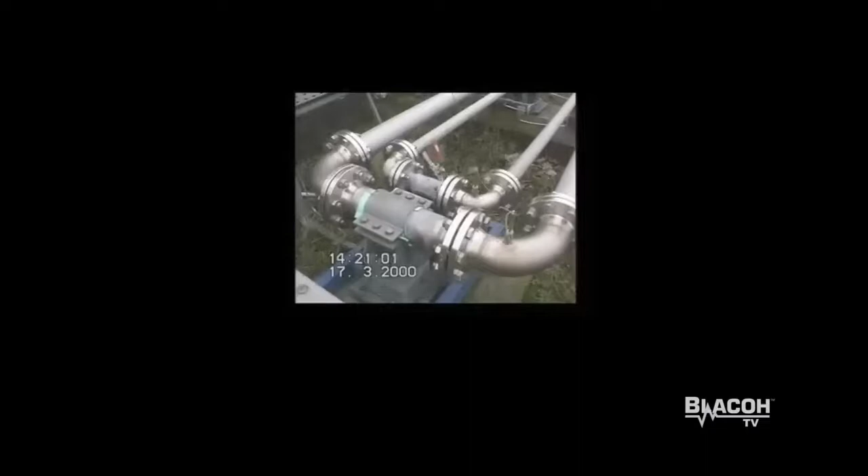Now pay attention to this because two things are going on. Hydraulic vibration and acoustic, okay? So what is this phenomenon? It's hydraulic shock, a momentary increase in pressure in a liquid system due to the sudden change in velocity of a fluid. That's the key point. It's not necessarily stopping the fluid, but a rapid change in velocity, okay?

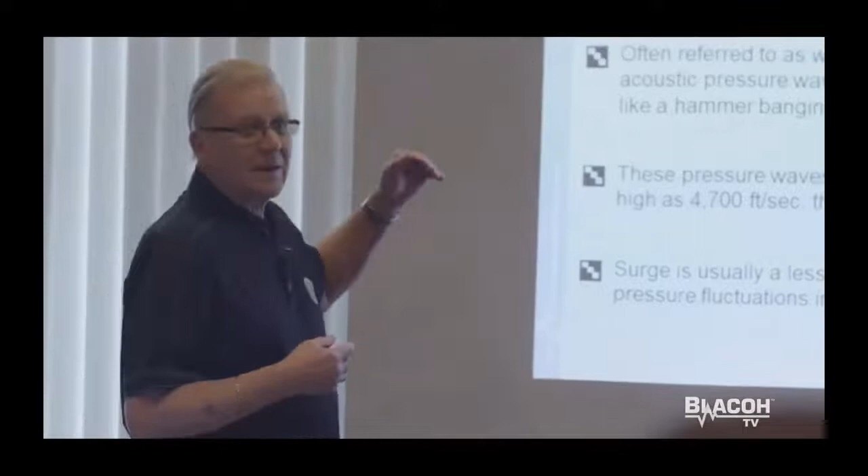Called water hammer because it creates this acoustic sound or this pressure wave or transient, and it sounds almost like a hammer banging on a piece of pipe. Now, since it's an acoustic wave, it's not just liquid shifting back and forth. This wave of pressure that's created travels at the speed of sound in water. Now, what's the speed of sound in air? About 1,700 feet per second. In water, it can be as high as 4,700 feet per second.

And that's important for a couple of reasons, but one of them is it's very hard for an end user or a customer to understand what's going on when a valve closes 500 feet away, 1,000 feet away, and at the pump there's an action almost instant. Now we've got our little coil demonstration. Most of you have seen we did that in the plant, and we can create some of that time lag. But people don't equate this acoustic wave with the reaction that occurs. So we're always emphasizing what happened, where did it happen, why did it happen, and then it's our job to figure out what to do to fix it.

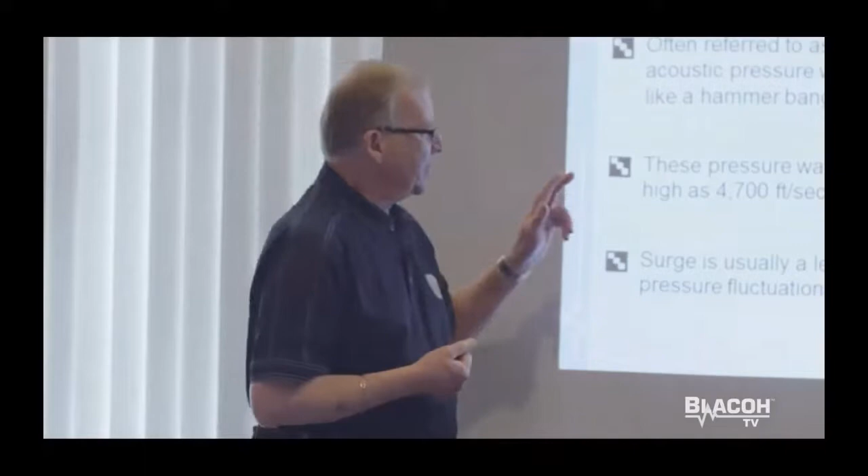Okay? And a lot of things can vary, but we call it water hammer or hydraulic shock. There's also a thing called surge, and the units are usually called surge suppressors, but surge is a less intense form of water hammer, and typically happens downstream of any valve closing, not upstream. So if we have uncontrolled hydraulic shock or water hammer, what's the potential? It can be 4 to 8 times momentary increase in pressure over the normal flowing pressure.

Okay, so I was a bit wrong. It's not 1,700, it's about 1,125 feet per second; in water it's 4,700. So with the same intensity, energy pressure in water is 60 times that in air. And that's why submarines have torpedoes that explode below the water line, right? Think about a tsunami and the energy that's carried for literally thousands of miles without dissipating. Liquid is a very efficient transfer of energy.

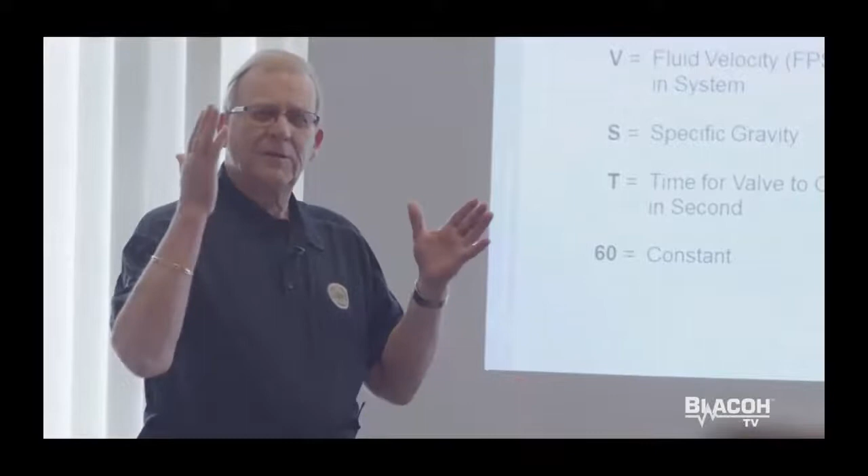A simple formula that's quite accurate in predicting what this pressure rise will be is 60 times the velocity of the liquid in the pipe, feet per second, times the specific gravity, divided by time. Typically, when we're talking about water hammer and a valve closure, which is probably 85 to 90% of the applications, we're using 1 second as a valve closure time.

This is a computer-generated graph of what happens when a valve closes instantly. You get an immediate spike and then a tapering off of this acoustic wave. It doesn't just stop, it reverses. When it hits another solid object, it reverberates back the other way and keeps oscillating until something breaks or the energy is dissipated through friction. Just much faster. A second is pretty fast, but in terms of water hammer, it's a long time.

So we're going through an exercise here: the velocity is 6 feet per second, specific gravity 1.2, and time is 1 second. Now, 6 feet per second in a process system is not all that fast. There are a lot of places going 8, 10, 12, even 15 feet per second. Obviously, the faster it flows, the more damage that can be done. At about 4 to 5 feet per second, you start being concerned about water hammer. So, it equals 432 PSI, okay?

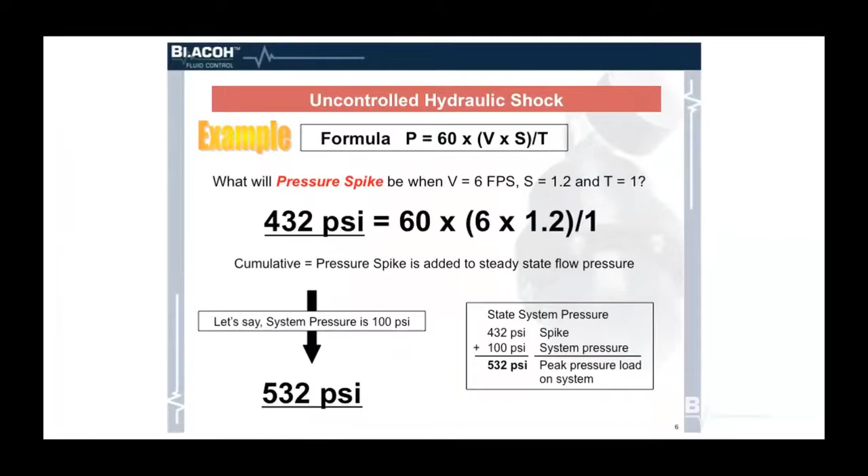Even taking that away, let's assume we've got plastic pipe, right? Plastic valves, and low pressure gauges, flanges, rated at 150 or 200, 250 even. And we're hitting it with 432 PSI above the system operating pressure. It's a formula for disaster, and it happened.

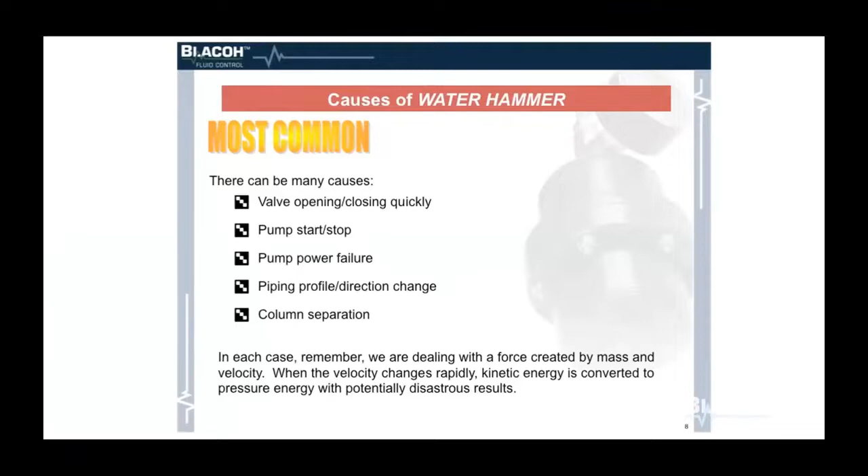Got a change in velocity rapidly, right? Valve opening and closing, pump start and stop, pump power failure, potentially one of the most dangerous areas there is, piping profile and direction change, and column separation. There are other factors that can create or increase the potential problem here, entrained air, because one of the things that we know about, and we will see later on, is that for all intents and purposes, liquid is not compressible, right?

But if there's a lot of air in it, or if it's hot water, there's a lot more air in it. You get the compressibility factor in there, now we've got a spring that can actually increase that spike as this water comes crashing to a stop. It's still moving, but there's air compressing in it. Then all of a sudden you get a secondary slam.

You know, no. The sad thing is no. We had a young engineer that had just graduated, worked for a summer as a work program with Blacoh years ago, Eric. I asked him about that. He said, you know, in 4 years of college, we touched on this for about 30 minutes.

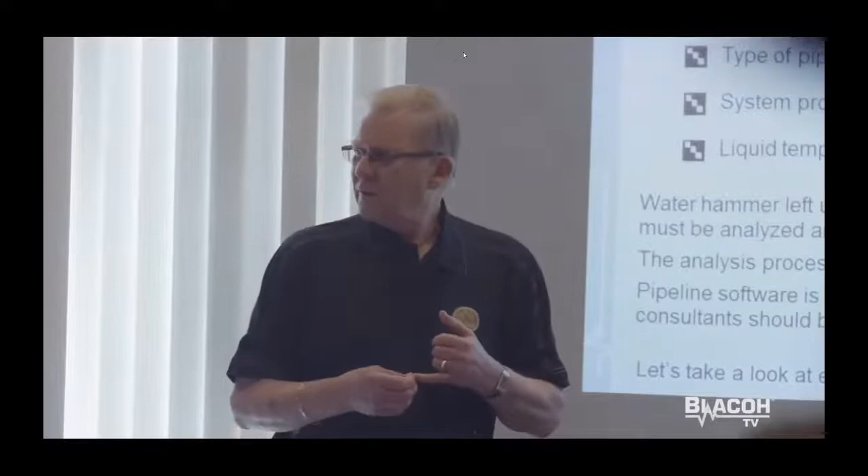You can't believe the number, well, you can, the number of systems that are designed without any concern or thought whatsoever for the consequences of valve closure. I took a course from an instructor several years ago who was an ASME instructor. We did a bunch of problems.

And one of them I always remembered was a 36-inch diameter pipe, 10 miles long, on a slight incline of 3 or 4 degrees. We calculated, and you can do this, the time to close the valve which will prevent slowing down the velocity too quickly. It took 24 minutes to close that valve, so you wouldn't have a rise in pressure.

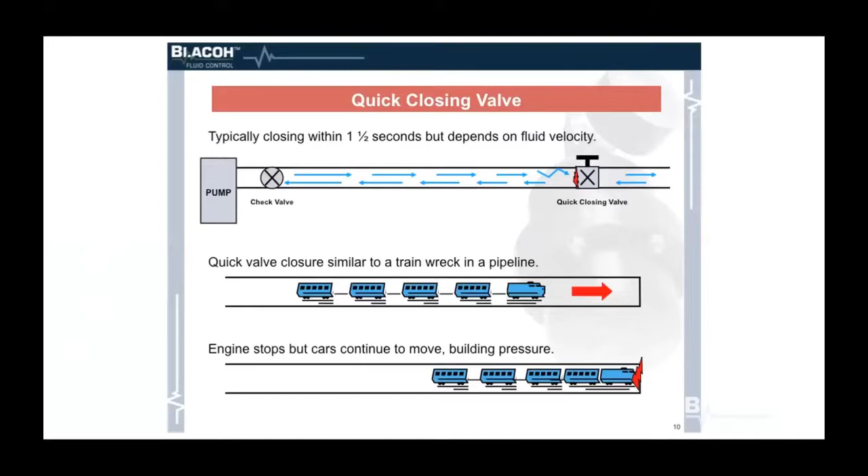Remember, the whole key is rapid change in velocity. If you can avoid the rapid change in velocity, you don't have a problem. And of course, that's where the Blacoh dampener comes in, our third step. Okay. Typically, closing within 1.5 seconds depends on fluid velocity. Quick valve closure is similar to a train wreck in a pipeline.

Okay, the engine stops, but these cars keep moving, and especially if there's more air in the liquid or more air between them. The first car stops, the rest of them still move until you get the big crash. I like to use the example of the crash dummy test, right? You've got this block wall, you've got a car traveling at 60 miles an hour. We'll get into this a little bit more.

And the car hits the block wall, stops rapidly. Velocity changes rapidly. What happens? The energy gets absorbed in the car, right? And the test driver and everything. If you put a spring at the wall so that the car came to hit the spring first, that spring would absorb the energy and slowly decelerate the car so that by the time the car hits the wall, there's no damage because the velocity is all slowly dissipated, right?

That's exactly what a Blacoh surge suppressor does, and we'll talk about that more. But think about it. The valve closes, right? The liquid is coming full force into the closed valve. If we have a surge suppressor properly charged and sized right there upstream of the valve, the liquid is directed up into the surge suppressor, which is just a big spring, right? So that liquid has a place to slow down, change the velocity slowly, and no pressure spike is created.

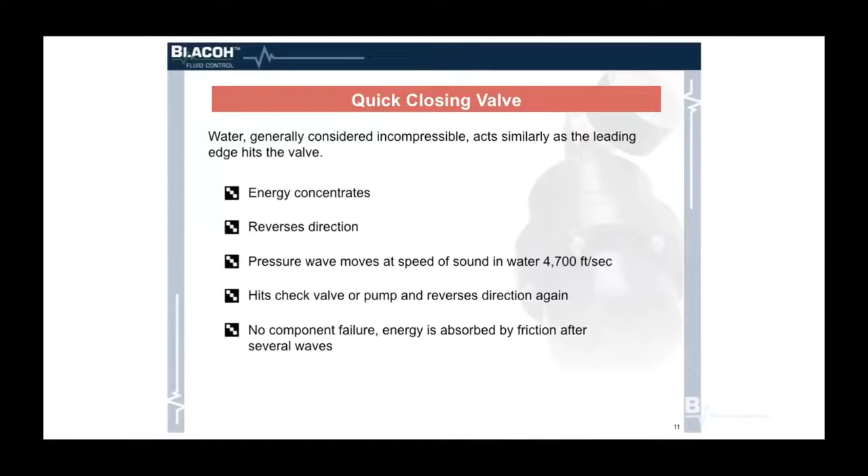And you can see that in that coil that we have. Energy concentrates, it reverses direction, pressure wave moves at the speed of sound in water, hits the check valve or pump and reverses direction again, back and forth. Energy is absorbed by friction after several waves.

This is a check valve in the system. And we'll do this, I think. Pressure on the downstream side is usually a drop in pressure, depending on what we talked about, the surge, which is on the upstream side of the valve.

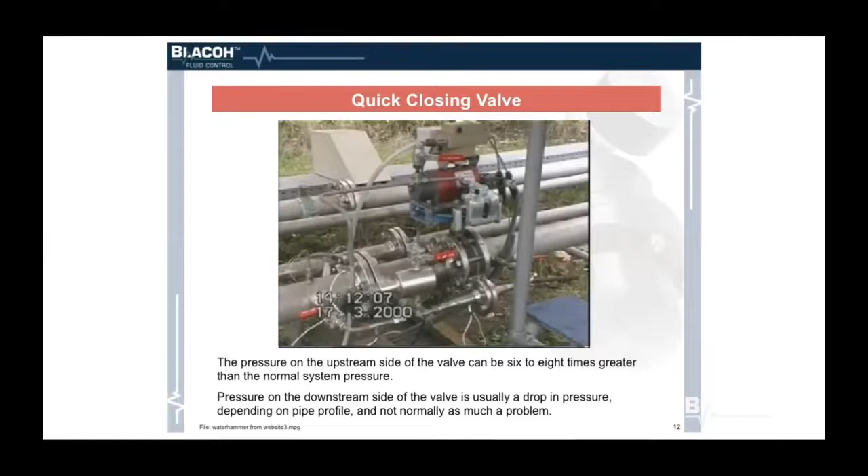That's the valve closure and hitting the check valve. Most all pump systems, see, there is the valve closure. Most pumping systems will have a check valve at the discharge of the pump to protect the pump when the pump is turned off. That's the check valve that was slamming. This is that whole system.

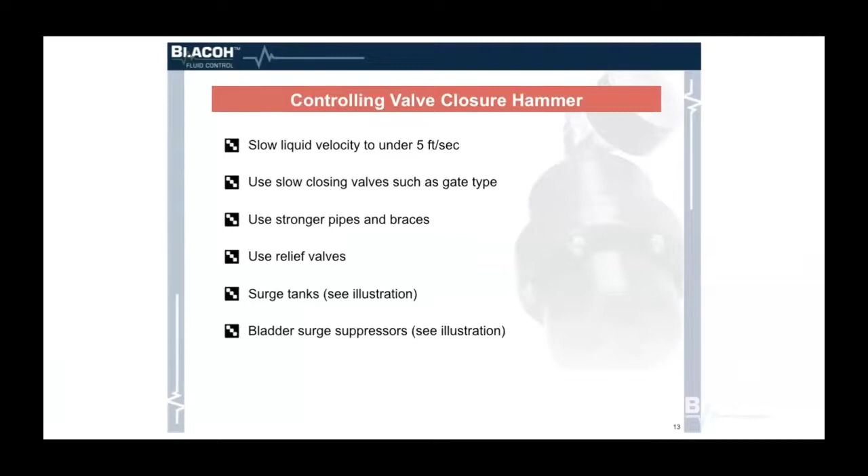So to control the valve closure hammer, slow the liquid velocity, use a slow closing valve, use stronger pipes and braces, use relief valves, surge tanks, or bladder surge suppressors. You could use any of these. The whole idea is either you're going to have to contain that energy or prevent it from occurring or transforming its makeup. I'm not going to go through all of these carefully.

One of the things that you can do is control the valve closure time, but typically they say, I want the flow to stop, I want it to stop as quickly as I can get it to stop. So they use a quick closing valve. You can use a surge tank, which is just basically a standpipe. The problem there is you can't keep the air separated from the liquid, so it waterlogs and loses its effectiveness.

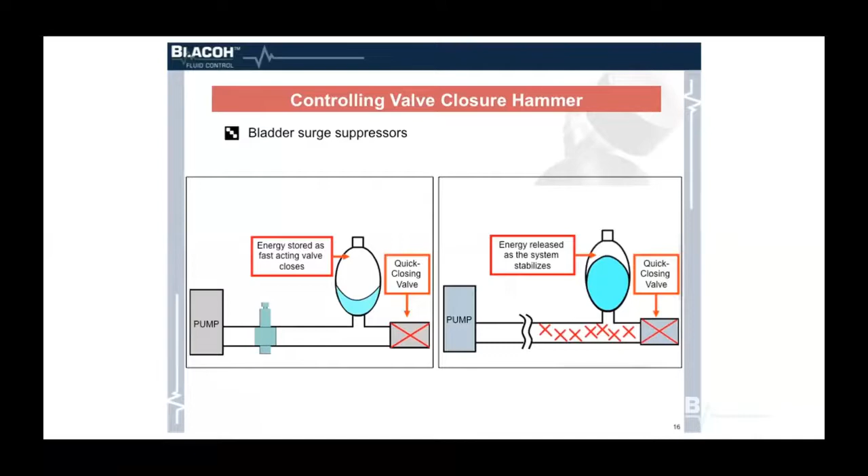The bladder surge tank is the best permanent, lowest maintenance product you can use to control this surge or water hammer phenomenon, because it keeps the gas separated from the liquid. We all know that.

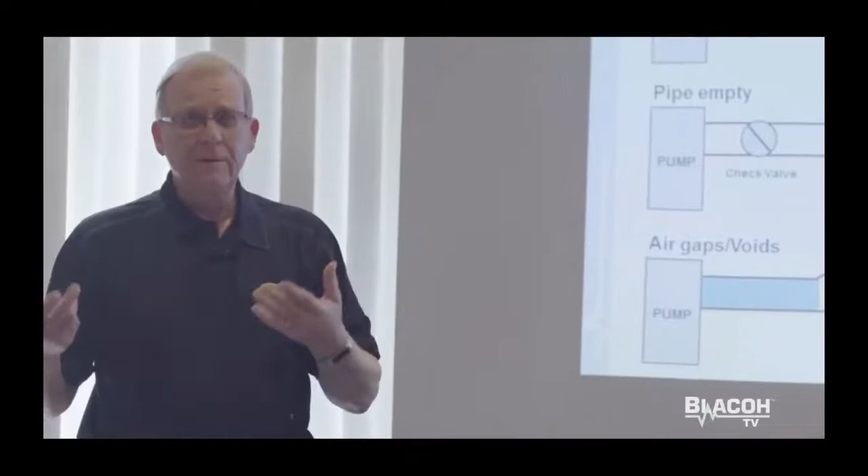Just some examples of what can happen now when you're running a pump, typically a centrifugal, but it doesn't have to be. One of the problems that can occur is when you have a pump start and the system line is full of liquid, but stationary. This is the problem. You have big sprinkler systems. That's why there always has to be some sort of a surge suppressor in these systems, because you're starting the flow of liquid against a block wall. And when that flowing liquid hits the solid liquid, that's not compressible and you get a big bang, okay?

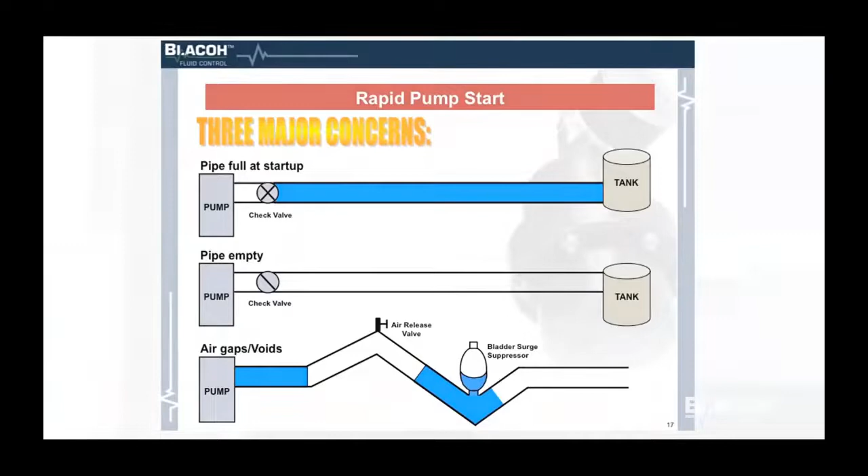The other situation that can cause a lot of problems is when the line's empty. Because now you're pushing liquid rapidly down an empty line that has only air in it. The air is going to move much more quickly without resistance until you reach some point at the end, which could be a reduction, an elbow, or any other thing that creates, again, a rapid change in that velocity.

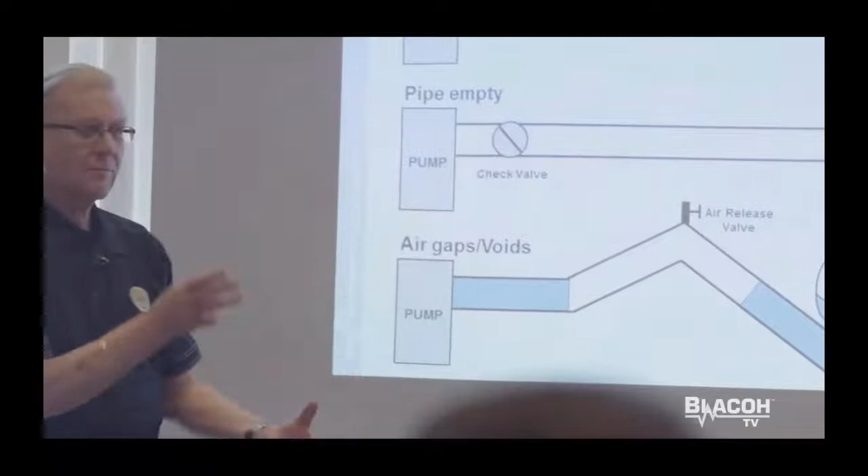Then there are other problems that start making these things complicated, and that's pipe profile. You can have liquid here and then a rise. When you turn the pump off, this area can be filled with air, then down below it can be liquid again. You start moving that liquid against air, and then it hits the solid line, moving liquid again, and you get all kinds of problems. So some of these get pretty complicated in the profile, and sometimes we have to get help doing these things, but most of the ones we deal with are pretty straightforward.

Now, this is what's called rapid pump shutdown, and you're going to see column separation. This also is a significant problem, because when you have liquid flowing at the discharge of the pump down the line, and you turn the pump off, the flow stops coming out of the pump. But that fluid will tend to return or reverse and come back, because you've got a section of pipe now with nothing in it, no air release, so you lower the pressure in this piece of pipe, and the liquid gets sucked back in.

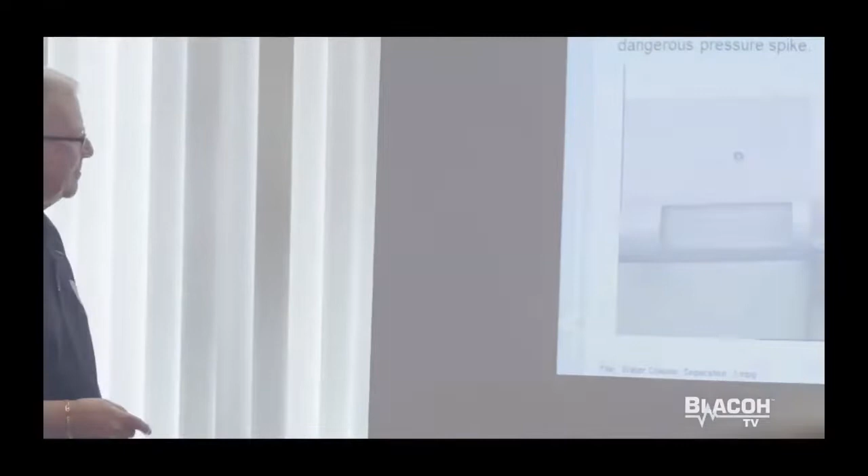It can actually be subatmospheric. You can go below atmospheric pressure in that section of pipe from the pump as the fluid moves away from the pump. Okay? So this is what happens, now watch this. It comes crashing back. And that's the reciprocating effect. What happened here is that acoustic vibration reciprocating, but here we're flowing along, the flow stops, the pressure reverses, and all of a sudden we get a big gigantic pressure spike as the flow reverses back through the pump.

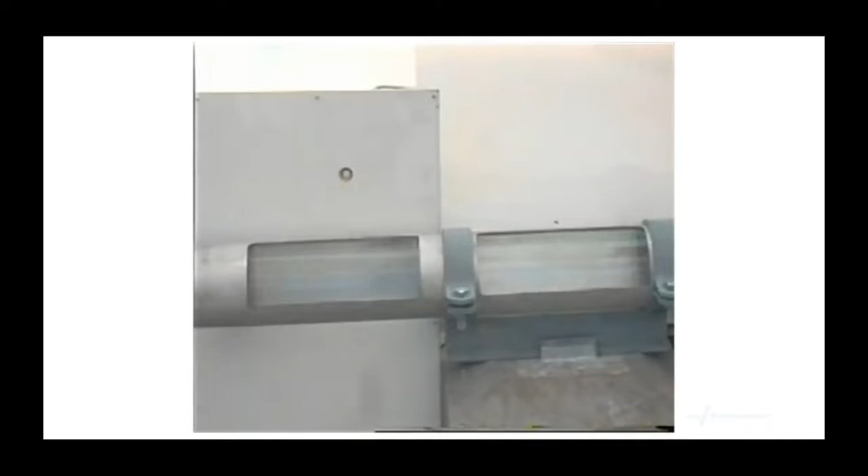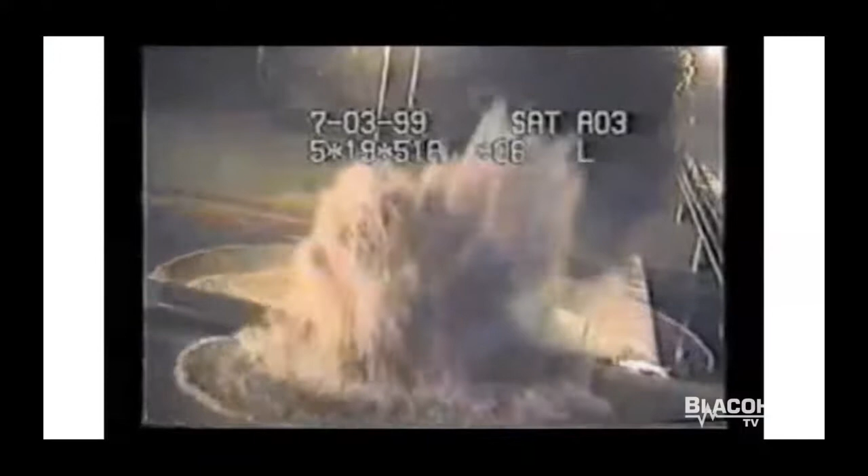This is big. That's a truck. There's the manhole cover. It's huge. All right, I'm going to go on because

So the ways you control start-stop are to use air release valves, vacuum breakers, slowly opening then slowly closing a valve at pump discharge, a check valve at the pump discharge, surge tanks, and bladder suppressors. So the same things you can use before. Again, the goal is to have the velocity of the fluid change slowly. Slow change, you don't get a buildup of energy all at once.

The suppressor acts, we talked a little bit about the spring and the block wall, but same thing on start-stop. If you throw the liquid into the line, you're going to have velocity hitting a non-moving column of liquid and a spike. But putting the dampener in is like putting a spring in, interrupting the system between the pump, which is the hammer, and the rod, which is the liquid stationary in the line. The spring absorbs that rapid start of energy by allowing the liquid to go up into the suppressor and hold it there until the non-moving column of liquid starts moving.

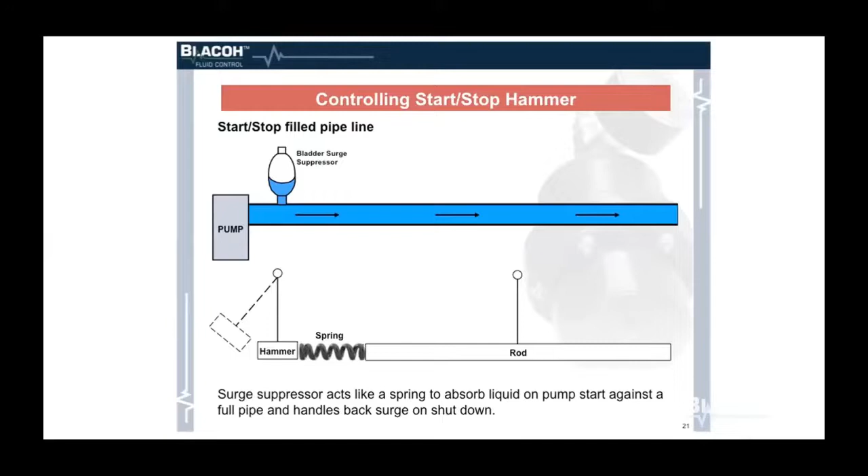It'd be like, let's say you're going to push a stalled car. You come up to it too fast, you hit the back of the bumper, you get an energy event and break bumpers, right? But if you put a spring on the bumper of the car you're pushing and hit that spring first, it'll first absorb some energy and then start accelerating the car in front of you, and no damage will be done.

Potentially the most dangerous situation of all is power failure, in which the pump is running, producing flow, and they lose power, which is unfortunately more common than people realize, especially in some rural areas. What happens is the pump stops flowing liquid. And remember our example of the liquid keeps moving and then reverses direction. And it reverses, and I can't give you the formula or the exact wording of it right now, but it reverses at the same velocity it went out.

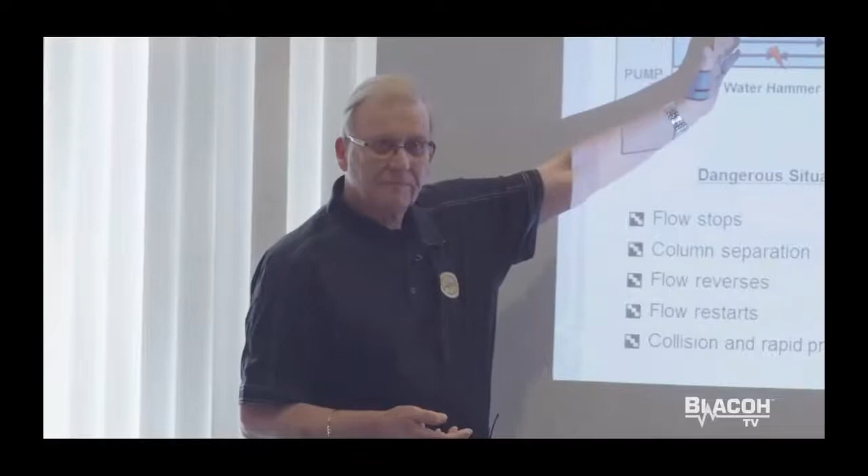So now it's reversing, it's coming back. Just as it gets there, the pump starts again. It's a momentary power failure. Now we have a head-on collision. So we've got the energy of this liquid coming and the energy of the liquid coming from the pump, and they collide somewhere in this area, and it's just catastrophic at that point. And again, putting a surge suppressor there is going to protect the system because it gives a spring where these two liquids come together and go up and decelerate again.

Now, in all of these situations we're talking about, with the exception of downstream surge, our device needs to be placed in the direction the flow is coming. If it's coming back this way, you would have a check valve here, and it would hit the check valve and go up in here. If it's coming from the pump, then you want this to flow up into the suppressor, and the check valve would be downstream. Okay, so the energy side is basically where the suppressor goes.

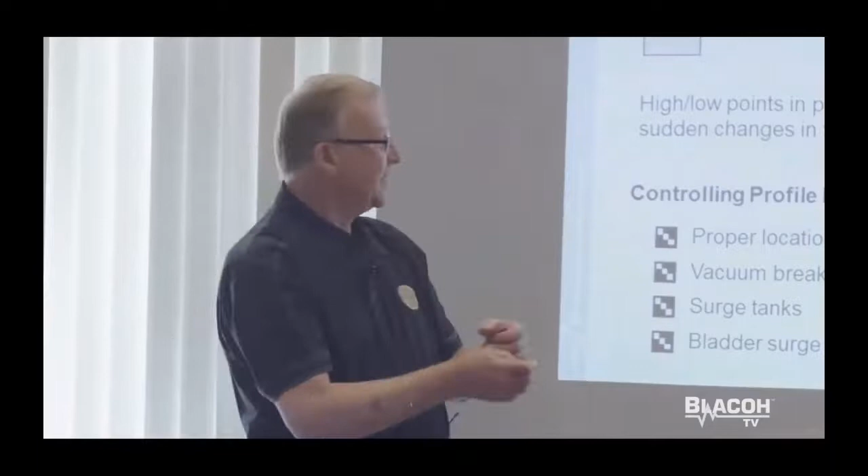Pipeline profile again can get very complicated, mainly because most of the customers don't even know the profile. But as you drive around the city, do you ever notice on some corners these green little standpipes with a neck on it and a tank? You ever see those? Inside is a float on a hinge; they're designed to let air out of the underground water system, so you prevent something like that. Those are nothing more than air release valves connected underground to the water system. And you see them all over the place if you take the time to look.

One of the problems is companies, especially contractors, like to try and get a low bid. They'll undersize the pipe. Well, to get the same flow out of a 1.5-inch pipe that you get out of a 2-inch pipe, what do you have to do? You have to increase the velocity, right? Which increases the pressure, which gives you that base pressure that you're going to rise up from when you have this event occur. So anyway, I say 5 feet per second there. Start looking at it at 4 feet.

This is what we need to know. What can happen? Why will it happen? Where will it happen? And then what can we do to prevent it? The toughest thing is when the customer calls us: what size pipe is it? Well, it could be 2, could be 3. How long is it? Well, it's 4 or 500 feet long, or 2.

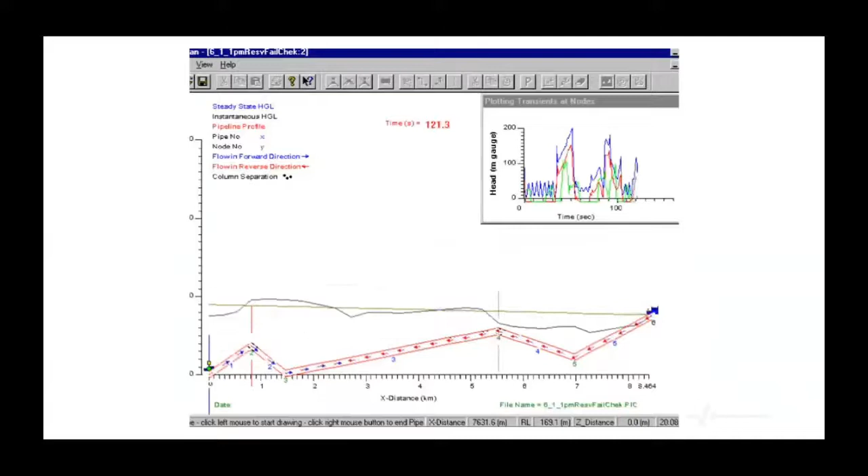Okay, now this is the whipping action. See the arrows changing as the oscillation occurs, and the pressure spike going all over the place, and then the profile up there of the pressure spike dissipating as it oscillates. And this is extreme stuff, but it happens every single day.

We had one situation with Graham. This was a diesel filling station for diesel locomotives, and they had a Blackmer sliding vane pump. We talked about those the other day, that they would use to pump the diesel to fill their locomotives, and these are like 4-inch lines, done manually. Well, when the tank got filled, the operator closed it, sent the shock wave back, and blew all of the sliding vanes out of the pump.

So we ended up putting, I think in that case, a 40-gallon unit out there. But my point is, this was all designed by an engineering firm, somebody who should have known the potential. It wasn't even considered. 90% or more of the applications we get into involving surge, and we get them almost every day, 90% of them are after the system has been built and operating, and then they find they have a problem.

But after the plant opens and after the first event occurs, then they're scrambling, and sometimes it's really difficult to find a spot to put the units in, and if you don't put it in the right place, it's not going to work. Remember, we said this is traveling at the speed of sound in liquid, which can be as high as how much? 4,700 feet per second, right?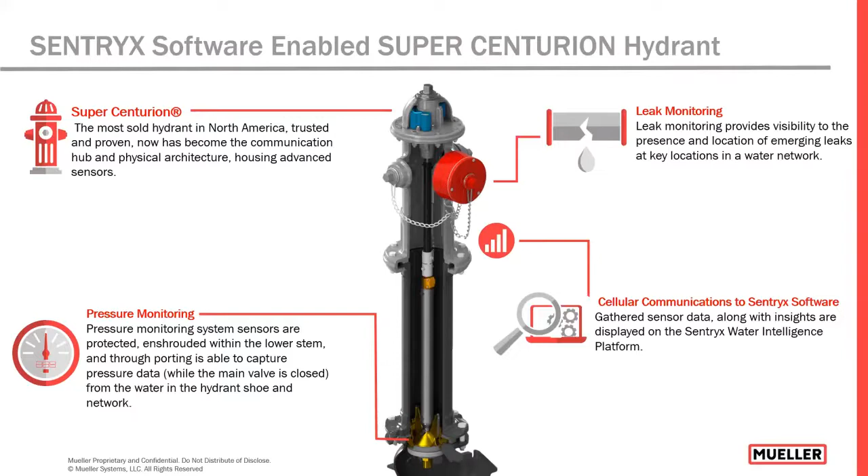So this is really just showing what all Mueller is trying to do, and this is not limited to Mueller products. So we really want to bring all the data points out in the system into one place. That's what I was emphasizing at the very start. Just having leak detection or just having water quality isn't telling the full story of what's happening in your system. So we have the Sentryx software.

That's collecting all of this data into one user interface, and then it'll allow utilities or supervisors or field techs to be able to look at your phone, look on your laptop, or even get alerts saying that a pressure has dropped and a leak has happened in between these hydrants. So really wanting to bring all of it together into one, because that's what we believe is going to bring the most value and the best decisions from these data points, is if you can see the full picture.

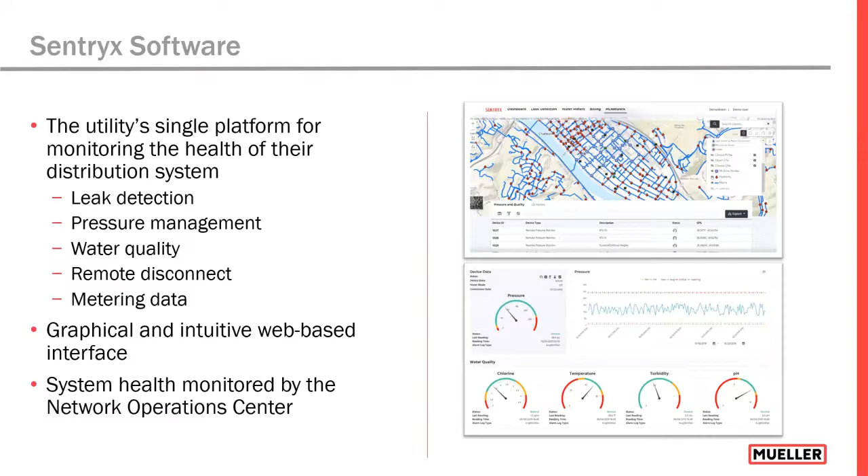So a really good overview of the smart hydrant. Again, it will be leak monitoring and pressure monitoring. That will be the two options. If you do have PVC mains primarily in your system, you can just have a pressure monitoring hydrant. It does not necessarily need to have both. But for pressure monitoring, it will be a dry barrel hydrant, so you don't need this hydrant charged. You don't need water pressure up to the cap. It will all be in the closed position and in the dry barrel position.

There will be no wires. It is a wireless design. I'm going to go through kind of how that looks and what the smart stem looks like. But basically the data is collected from the shoe area and then Bluetooth to the bonnet, which is then going to push its data through the cellular network. So there's no wires. If a car hits this hydrant, it will break just like a normal hydrant would right there at the safety coupling. And there won't be any wires sticking out or anything like that for your customers to worry about. So it is a wireless design and would operate very, very similar to a Super Centurion.

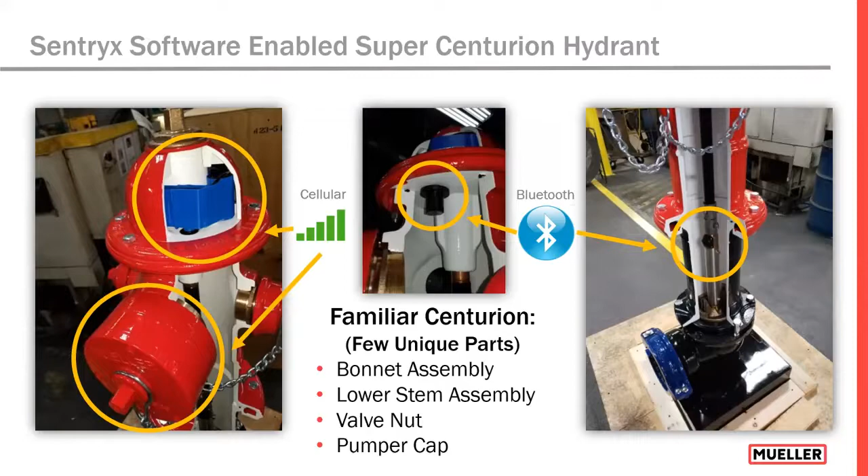The leak monitoring cap will also look very similar to a pumper nozzle. It's going to have the threads that your utility uses on a regular hydrant, and the op nut will be similar to what each utility has for their hydrant fleet. Sandwiched right in the middle is the processor, the battery, the antenna, and the acoustic sensor. It will really only stick out a couple inches from a normal hydrant cap, but it will look and feel very similar to a normal Super Centurion cap.

You see there in the middle, the smart stem. It'll have a Bluetooth antenna. It'll have the pressure sensor that will go through the main valve into the lower part of the shoe, and we'll be able to get pressure from the closed position. And then you see there a smart bonnet. It's going to have the same look as the Mueller bonnets. It will have the opening direction, where it was made in Albertville, Alabama, and again, that oil reservoir where you can put food grade oil into your Mueller fire hydrant.

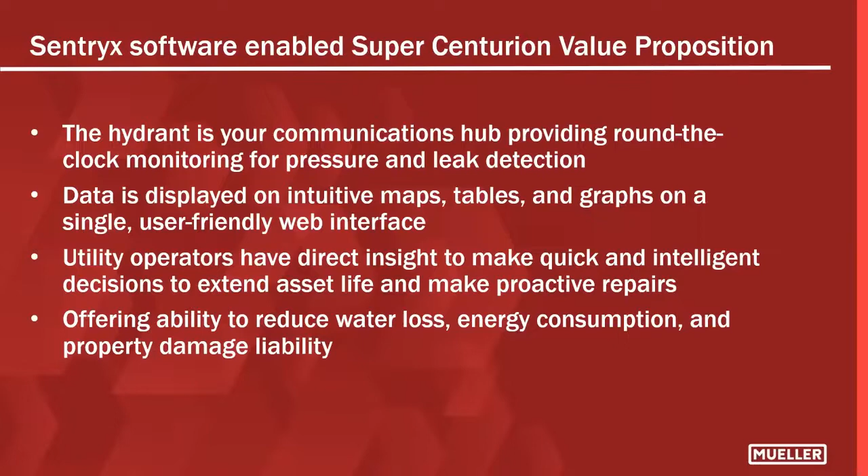So with that, it will reduce water loss, and it will reduce your energy consumption and the liability that leaks or transients can cause in a water system. We want to help out in every way we can. So with that, we'll open it up for questions, because I don't want to go over if people have time here. Does anybody have any questions for Bobby?

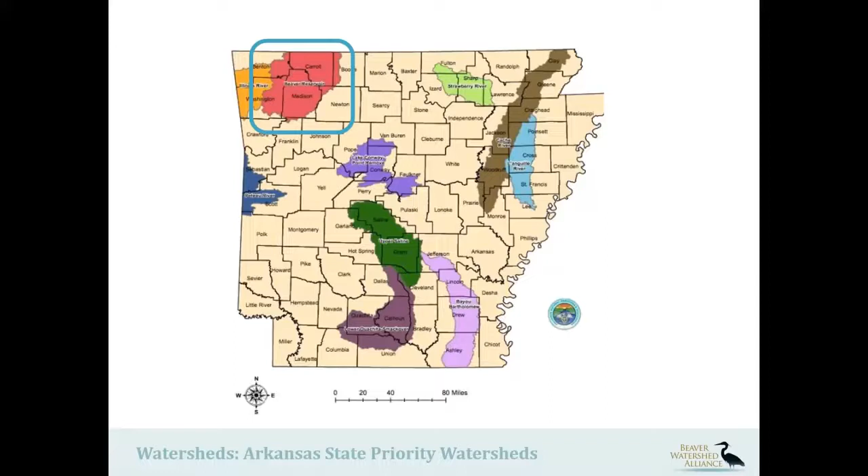And there are segments that are listed on the 303(d) list. Those are defined every 2 years by the Department of Environmental Quality. And those segments, we're just looking at trends and things over time, and it also helps guide our work on where we could do best management practices to proactively prevent future segments from going on the 303(d) list, but also try to address some of these impairments and repair or restore waterways.

So sediment is the #1 pollutant to Beaver Lake, and we call that non-point source runoff because you can't point specifically to where it's all coming from. It's coming from several different sources. So dirt roads or stream channel erosion, or maybe ag runoff or construction runoff. These are the different sources of, when it rains, sediment flowing off the landscape and into a nearby waterway.

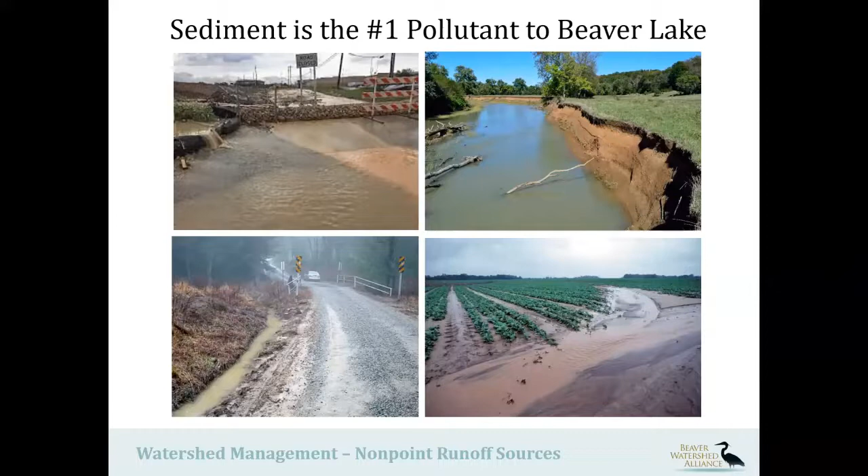And with that sediment, it can carry phosphorus and nitrogen, which can cause algae growth in our waterways. And so that algae growth is expensive to remove for water utilities, but also can have effects on aquatic species and humans.

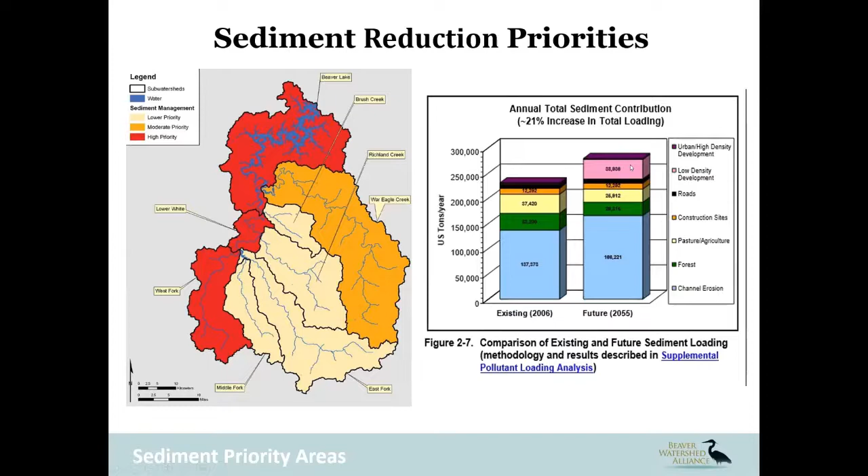And the chart on the right, this is using modeling and data to show us that channel erosion is the largest contributor of sediment, but in the near future, low density development is expected to increase and contribute more sediment loading to our waterways. So something to think about as we grow and develop, how we can protect waterways as we do that.

Northwest Arkansas is a rapidly growing region, especially there in the core, the western side of the watershed, and the eastern side of the Illinois River. That's the Rogers, Springdale, Fayetteville, Bentonville area, growing very rapidly. And last we heard, 32 people were moving to Northwest Arkansas per day. We're expected to have over 1 million people by 2040.

So just to kind of go through some of these different things we're doing to help address water quality in this area. Our best outreach method is to reach landowners directly. So we mail out newsletters to them directly. So if you live in the Beaver Lake watershed, you may have seen our newsletter; you get that 3 times a year. And we try to put information in there for landowners on how they can take advantage of programs or how we can help them manage water on their property.

We also have an e-news that we send out every month that has a lot of information on events and things to participate in, or just general updates. We're on social media. We host a quarterly speaker series covering topics for water quality professionals. We have an annual Beaver Lake Watershed Symposium each year. And we also do a number of public speaking events like this, best management practice workshops, and we also have youth programs as well.

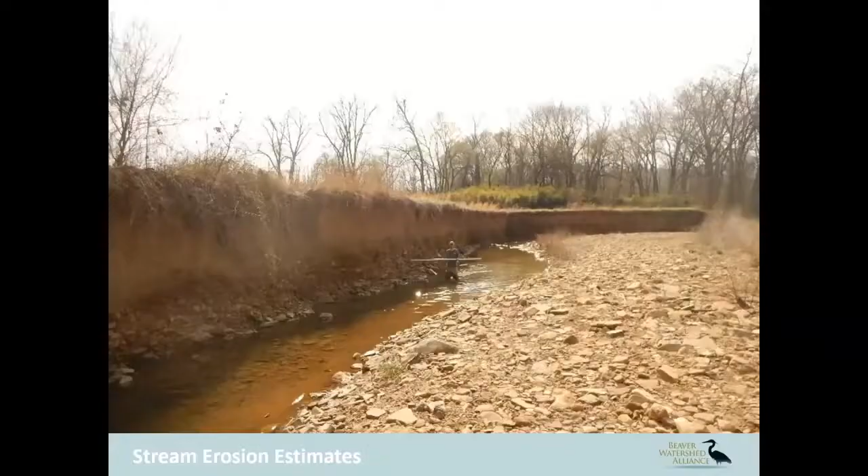We work with partners to also measure stream erosion rates to learn the sediment loads coming from specific areas of the watershed. This is a project with the Watershed Conservation Resource Center. We came back in, this is the same spot here. You can kind of see that River Cane in the back as a point.

And through funding with the West Fork White River Initiative, the USDA program, we're in year 5 of that, we're able to help these landowners restore these waterways. And these restorations are done in a natural way. So they use a lot of plants and rock and trees and things. So it not only stabilizes the bank and prevents sediment from going into the waterways, it's also providing a lot of other benefits like fish habitat.

You know, the West Fork water has, they've lost over 2/3 of their aquatic species. So they're trying to bring back the smallmouth and largemouth bass to these rivers. So these types of restorations can help with that. It's also helping the landowner.

With the price of an acre in Northwest Arkansas today, losing land is not a great thing. So we've had some landowners report losing up to 4 acres of land per year along these riparian areas. So when these areas are restored, it helps keep that land intact, but also helps improve water quality.

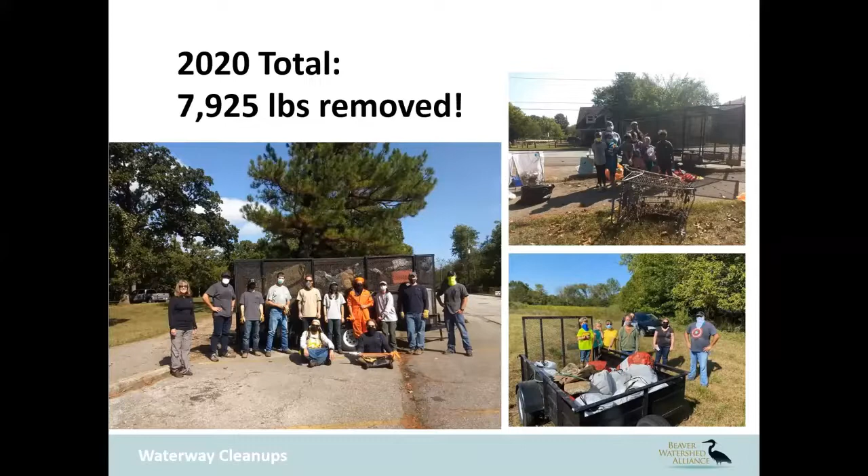And we also conduct scientific monitoring. So we do serve on a harmful algal bloom work group for the state. We are contracting with the University of Arkansas to monitor water quality in the West Fork. We help support a stream gauge at the White River over in Bunch Park at Elkins. We help with pond sampling.

We participate in Secchi dip-ins and Secchi Day with Beaver Water District. And we're monitoring ponds, streams, and we're also doing a lot of studies on before and after best management practices installations.

So some of our current initiatives for this year are, as I mentioned earlier, the USDA program for the West Fork. We're in year 5 of that. And we're really working to technically assist these landowners. Over $8 million is being invested in this watershed to improve water quality.

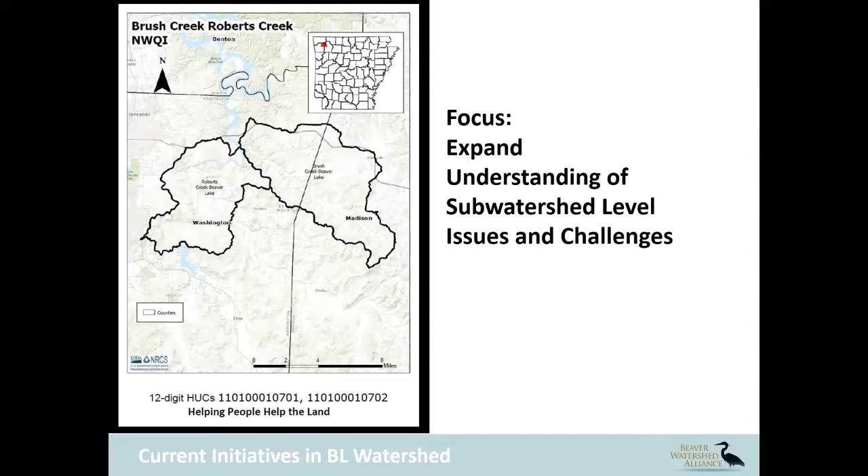We do work with a number of partners, and we appreciate our partners that help fund these activities, but also our partners that help provide their time, their resources, their expertise. We just work with so many people, and it really does take a group to work together to achieve these big goals. So we want to thank all of our partners that help keep Beaver Lake watershed clean and healthy.

Okay, so if I have a few more minutes, I'm going to cruise into the watershed tour, if that's okay. Yeah, sure. Cruise on in.

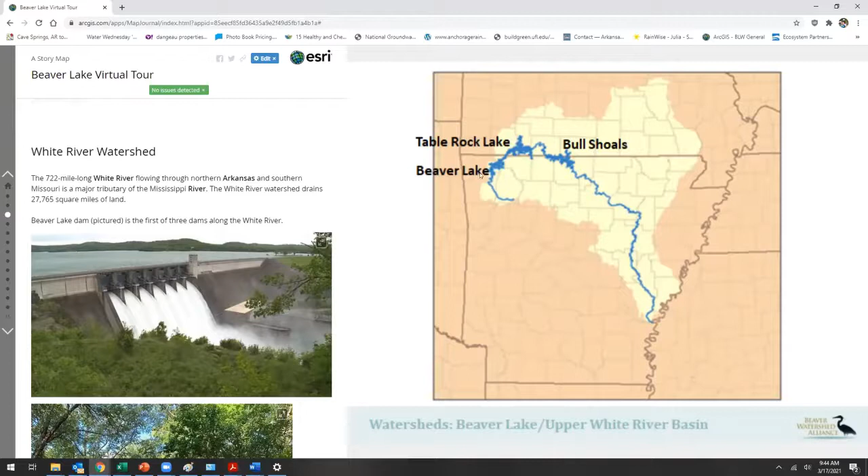So it's pretty neat to think that the White River really starts here in Northwest Arkansas, on places like Mill Creek and these small creek areas. But by the time you get over to Calico Rock, which is over here, just south of Mountain Home, the rivers have joined, and now you're looking at a large White River system.

The Beaver Lake watershed encompasses over 1,000 square miles, and it covers portions of Washington, Benton, Madison, Carroll, Franklin, and Crawford counties. The greater Beaver Lake watershed area stretches beyond the dam and includes the Kings River and waterways draining to Table Rock Lake. But our strategy and our focus is basically from Beaver Dam, which is located about right here, everything upstream here.

So the sub-watersheds, watersheds are nested within watersheds. We could get very small with these, but these are the 7 sub-watersheds that we focus on. And that includes the headwaters, the War Eagle, Richland Creek, the Lake Sequoyah or East Fork of the White River, the Middle Fork, the West Fork, and the Lakeside area.

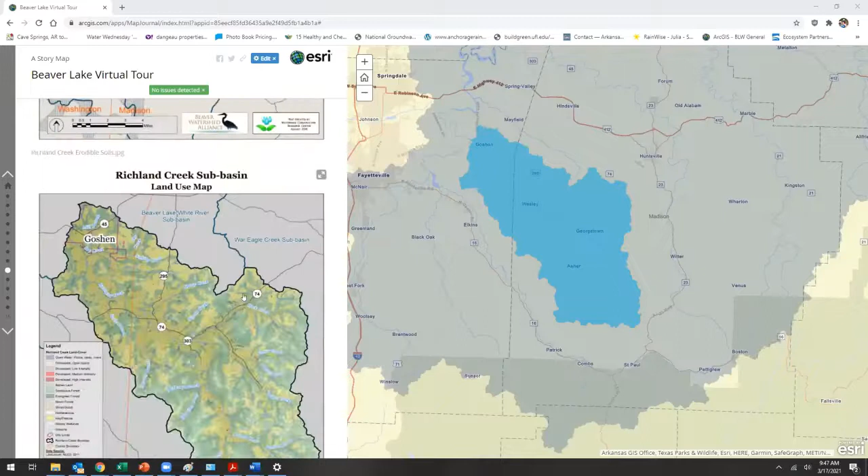Let's see, Richland Creek here, also very steep and highly erodible soils. Again, it's mostly forested. About 55% is forested, and about 36% of this watershed are pasture or hay areas. A number of unpaved roads identified here as well.

But you see here, these are the issues we're dealing with on Richland Creek. These large stream erosion issues. We get calls from landowners quite often on these things. And if you've ever been to Twin Bridges, that's where Richland Creek and the White River come together there.

So another thing about these rural watershed areas is that there's a lot of septic systems. So there's programs that are coming out through the state and local groups that are helping to address septic system repair and replacement. So that is something that can help improve water quality.

And I thought this was interesting. There's over 7 rural fire departments that serve this Richland Creek watershed area: Goshen, Wesley, Japton, Elkins, Round Mountain, St. Paul, and Bohannon Mountain. They help cover those areas through the volunteer fire departments.

And this is important too, because as Northwest Arkansas grows, more people are moving to these rural areas. So that means more housing and demand for new infrastructure. So there's going to be a need for more rural water service providers, fire departments, things like that. So it's important to work together so that we have these resources for infrastructure. That's a really nice picture of Richland Creek there.

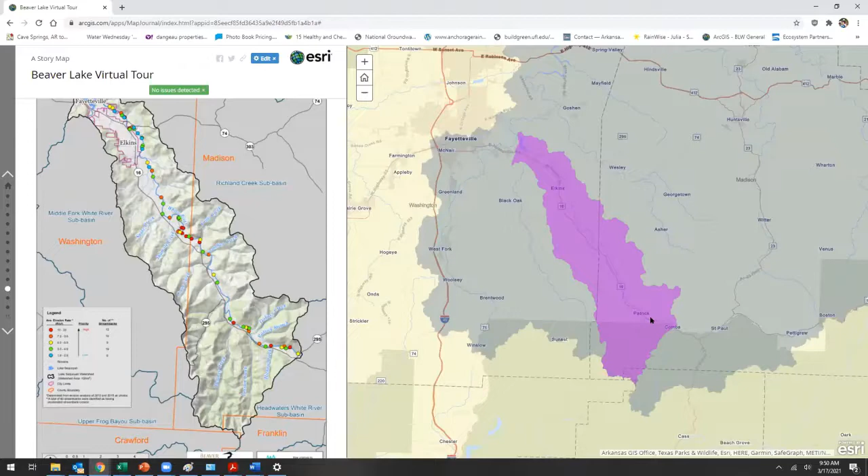Oh, and what's interesting here is this is about 70,000 acres of land that's draining to Lake Sequoyah. So if we think about Lake Sequoyah and the water quality there, that's a large amount of land that's draining to that lake. So it's important to do best management practices and manage water here for Lake Sequoyah as well.

And this is Lake Sequoyah out here. If you've been out there, there's actually an old bridge you can see, which is the bridge that went over the original White River channel. So it's pretty neat to see that's how big the river was at one time. And so it's really neat to have these little pieces of history that are still within our watershed.

So the Middle Fork, a pretty rural area, the community of Black Oak out there. And again, mostly forested area, very erodible soils. And the furthest watershed here is the West Fork of the White River. And this is important because this is where a lot of development's going on. So Southern Fayetteville, Greenland, West Fork, all the way down to Winslow.

So that's the West Fork watershed area. It covers about 80,000 acres. And there are segments on the West Fork that we saw earlier that are on the 303(d) list. So we're working with a lot of partners to address sediment and runoff issues happening in the West Fork. And again, it is a priority watershed.

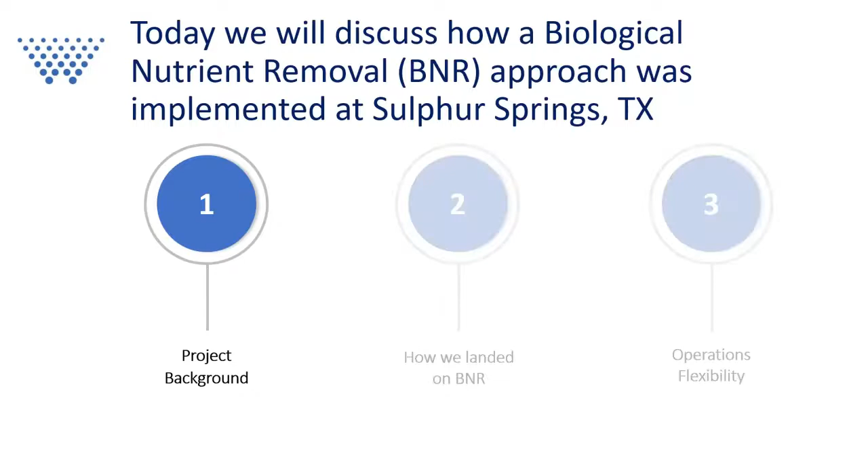So today we will discuss how a biological nutrient removal approach was implemented at Sulphur Springs, Texas. So I have three points here. We're going to go through some project background, how we ultimately landed on a BNR scenario, and then some of the things that we did from an operations flexibility standpoint that really made this facility ready for the future. So next slide, project background.

So Sulphur Springs, Texas faced an immediate need for aeration improvements. What we had here was a conventional activated sludge plant that really just had a series of CSTR reactors, all operating in parallel, with mechanical aeration. This is a picture, and I apologize for the graininess of this graphic, but this was an existing 5.4 MGD wastewater treatment plant that operated, again, as conventional activated sludge.

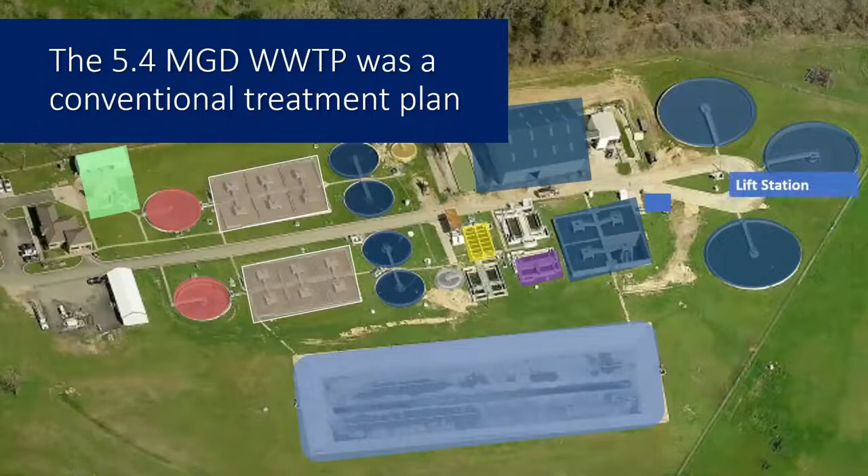You can see here, we come in, we have a lift station, we have a flow equalization basin there on the bottom of the screen. We had a headworks facility with grit removal, followed by primary clarifiers, and then again, the activated sludge system. We have a north train and a south train. It's probably a little hard to see, but there's 6 individual cells on the north and 6 individual cells on the south, and each cell had a dedicated surface aerator or vertical turbine mixer.

All the primary effluent flow went into this center channel and then was dispersed equally. Well, it was supposed to be equal. We know it wasn't. The flow split was definitely a concern. But each of those 6 cells in the north and the south were supposed to get the same amount of flow. Then mixed liquor would flow over an effluent weir in each cell down a common channel on the outside and then go to the clarifiers.

What is that? Sulphur Springs, Sulphur, Texas, I think he said.

Yeah, Sulphur Springs, Texas. And then we had filtration that was already at the plant, and then chlorine disinfection with the chlorine contact basin. So that kind of

sets the stage. You guys still hear me? My computer just flashed. Loud and clear, buddy. Okay, good. Well, all my Zoom stuff just went off my screen, so I was worried about that. I'll keep going.

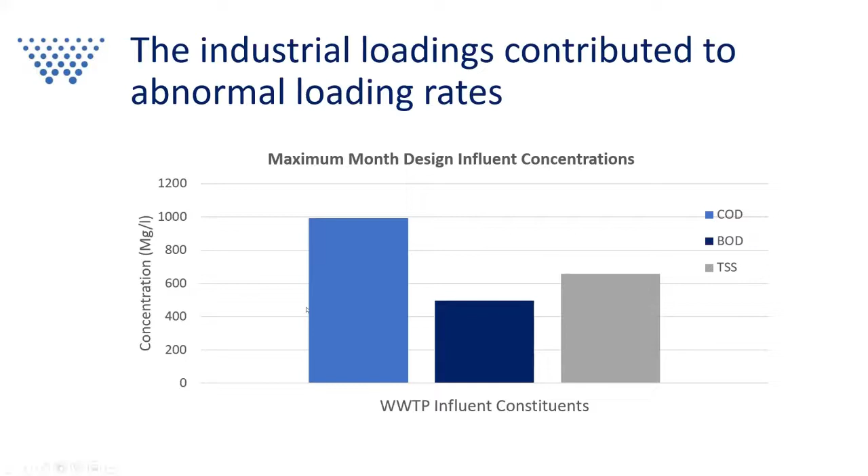The surcharge wasn't really enough to cover the cost overruns, but there was a lot of political pressure to not press back on the industry too hard with fear that they would leave the town, and it was a very big source of jobs for the city of Sulphur Springs. So we know that can always be an issue, and that's something that had to be considered in this particular facility. So these increased loading rates overloaded the existing wastewater treatment plant. The flows didn't necessarily come close to the design capacity, but it was the loadings.

And Sulphur Springs received notice of violation from TCEQ for TSS, ammonia, BOD, pH, chlorine residual, and the overflows they had in the system. So they entered into an agreed order, which meant, hey, you have to go do an engineering report and really figure out what your problem is. So I like to show this slide. So an anomaly was discovered before we even started the design process.

So on the x-axis here, you have dates. So this was a project that we started the study on back in 2015. So it's a few years old. So you can see this data range is January of 2010 through June of 2014. And then what we see on the y-axis is the raw influent loading. And that's in pounds per day. So that ranges from 0 to 50,000 pounds.

And so in the blue, we kind of have our rolling 30-day average of BOD loading. In the green, we have our rolling 30-day average of COD loading. And then in, I guess that's a brownish orange color, we have our rolling 30-day average of TSS loading.

And something I just want to point out here is when engineers start working on projects, we always ask for a lot of data. And I know that we always ask for more data than is really ever available. And a lot of times as operators, you may be wondering, well, what in the world is the engineer going to do with all this data? Why do they need it? Why are they asking me so many questions? And the answer is really simple. We use this data to set the design criteria for the path forward.

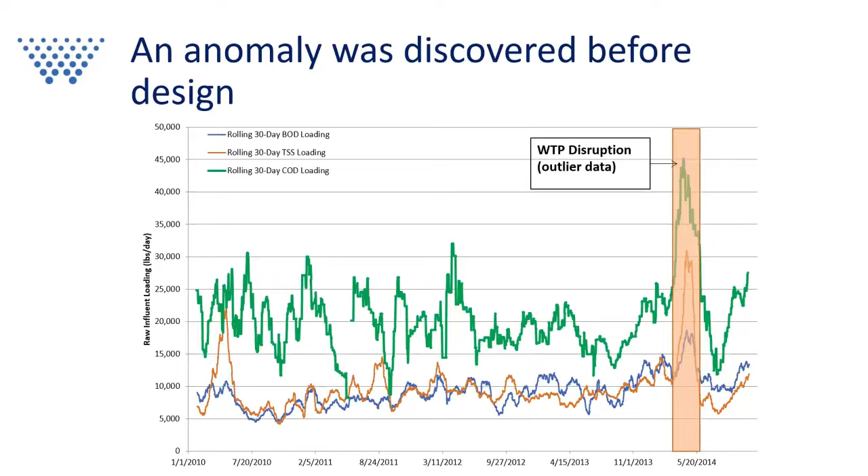So knowing the why behind the data, we were able to discard that data and consider it an outlier, and that was not used in the plant design criteria, as it would have led to a really crazy over-designed plant. So planning efforts at Sulphur Springs focused on current conditions as well as future projections. So again, this was a 5.4 MGD average day wastewater treatment plant by permit.

So we effectively looked at some growth projections and really decided, through coordination with the city, that there were really no growth projections over the next 20 years that would make us exceed that original 5.4 MGD average daily flow design criteria or capacity. So we didn't have to do any revisions to the permit. But I do just want to point out that our design peak month loading conditions are significantly higher than what they currently saw at average day.

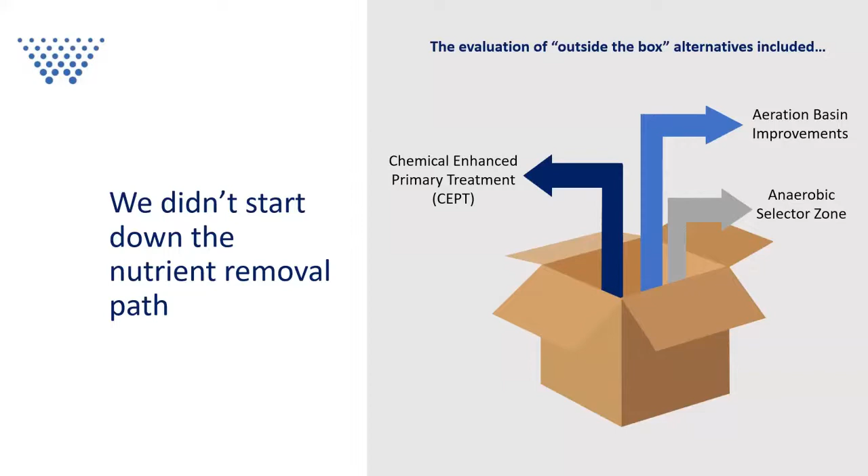We knew there could be some improvements to the aeration basins. You'll see a slide here in a second that their existing surface aerators just did not provide the oxygen that was required. And so could it be as simple as CEPT plus some aeration basin improvements? And we threw out the idea, well, if we could fit it in, we could go in and put in an anaerobic selector zone. And maybe that would help us today and provide that flexibility and that benefit for future BNR.

We know that CEPT would require capital improvements. We would have to put in a chemical storage and feed area. We do know that based on feeding a coagulant that we will increase our primary sludge, and we have to make sure that our solids train can actually handle that. And then we put in here increased corrosion.

When we did the benchtop study, ferric performed the best as far as BOD removal. And so if you're going to think about ferric or anything like that, then we have to be concerned with increased corrosion. But spoiler, we did do jar testing and we really confirmed that this was not a viable option. And all that goes back to the fact that I mentioned there's a big dairy industry in the town. So a lot of the BOD that we saw coming into the plant was soluble BOD.

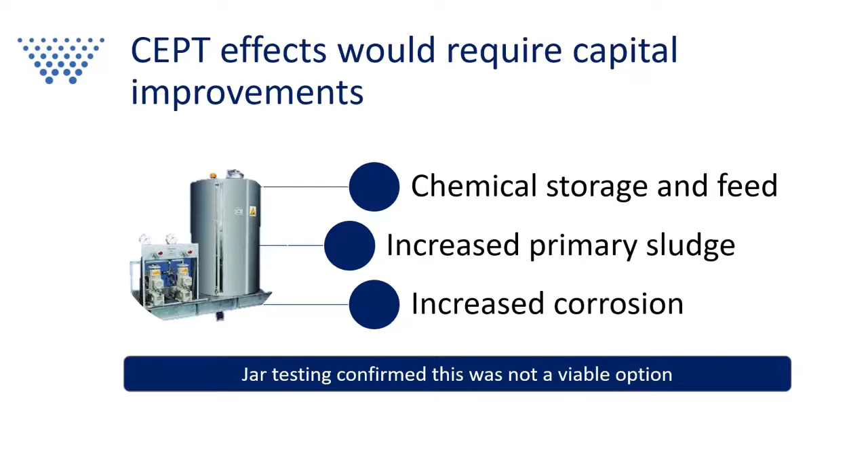And the primary clarifier really works by taking out the particulate items. You know, we add that coagulant, we stick particles together, we settle out particles. And so if there's any particulate BOD, that would come out in the wash. But since this was primarily soluble, we didn't see enough of a removal with chemical treatment to really solve our problems. So we had to look at another route.

So since the CEPT results were not promising, we turned our attention to the biological treatment process. And the first thing, based on the high BOD loading, we did the back of the napkin airflow calculations and the aeration basin volume. It was a staggering high amount. Most plants don't see a 500 milligram per liter or 600 milligram per liter BOD coming into the plant. If you remember, our design criteria was 394 or 364 milligrams per liter, and that was coming off the primary clarifier. So we'd already removed about 20%.

And we knew that the existing biological process had some severe limitations, but we had a hunch that it would prove to be valuable with some enhancements and some expanded volume. So I kind of alluded to this earlier. The existing surface aerators had limitations. So this picture here is simply a picture of one of the surface aerators and one of these single CSTR reactors. And the graph here on the left is some actual DO data from one of the times we were in the field and took some samples.

And so what you see on the bottom for the bars, the N1 through S6, those are the different cells. So north train cell 1, south train cell 6. And then on the y-axis is the DO in milligrams per liter, ranges from 0 to 5. And what we saw was obviously the flows weren't distributed very evenly, or the loadings weren't distributed very evenly, because in north cell 6 we had ample DO, above 4. But let's just say in north cell number 3, the plant struggled to maintain a DO above 0.5 milligram per liter. So we knew no matter what we were doing, the surface aerators had to go, and it had to be replaced with a fine bubble aeration system.

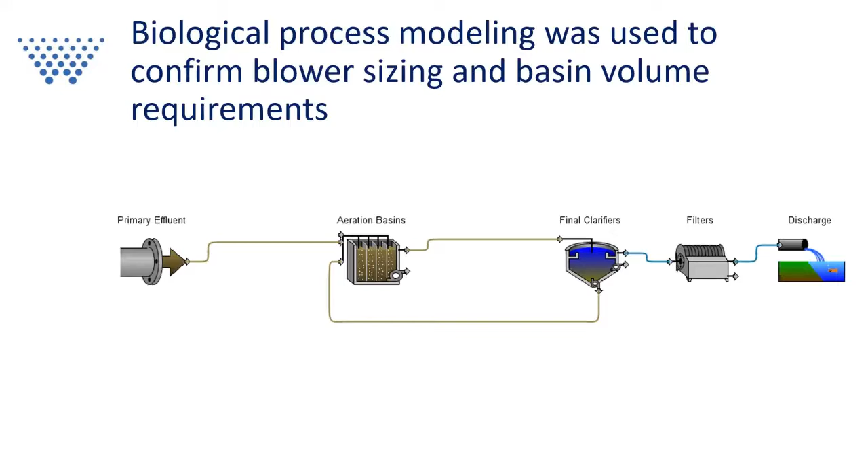And within this model, we're able to adjust recycle flow rates, we're able to adjust airflow rates, different DO targets, to just see what our anticipated effluent quality would be. So the first thing we did with the model is we looked to determine or confirm our required airflow rate. And the required airflow rate here was 10,630 CFM for a conventional activated sludge system.

So let's just keep that 10,630 number in the back of our minds, because if we had a traditional 5.4 MGD plant without all this extra loading from the industrial user, I'd probably tell you this airflow rate should be about 5,500. So what we saw here was approximately double what a typical municipal plant would be.

So at design loading conditions, the required aeration volume resulted in a hydraulic residence time of 16 hours. It's not really excessive, but anytime we talk about a long detention time plus high BOD loading, we always have a concern that we're going to grow some filamentous bacteria and just give us a lot of heartburn when we go try to settle in our secondary clarifiers. So that's something that we definitely wanted to be aware of.

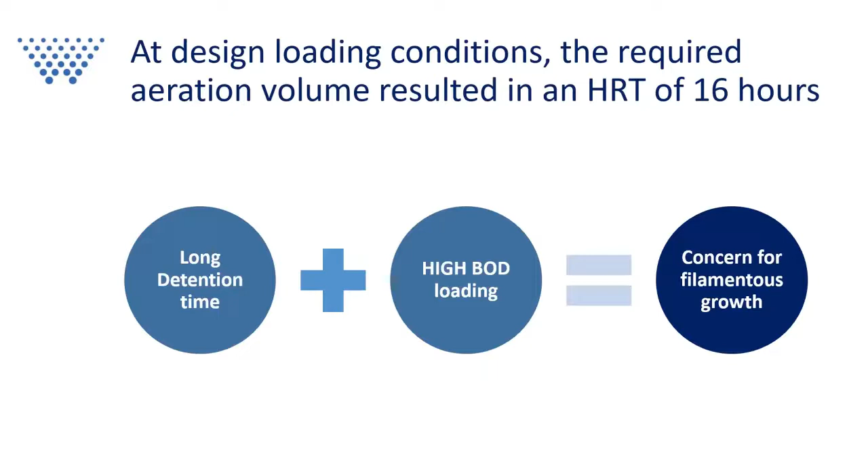And what we found was that it dropped our aeration horsepower from about 350 horsepower, per blower that we had on site, to 250 horsepower blowers. And we had 2 of those for a duty point. So it did reduce a lot of our horsepower for aeration requirements.

And we know that selector zones can also provide multiple benefits. I just discussed the decreased energy consumption. The reason we looked at it to begin with was for the decreased filamentous growth. And then we know there could be some improved treatment. We know that in anaerobic conditions, we take up a lot of BOD there. So, hey, that could help us out in the aerobic zone.

Plus, the big driver is that in the future, it sets the stage for future BNR. It's pretty easy to bring in a mixed liquor recycle and route that back to take advantage of maybe some future nitrate removal.

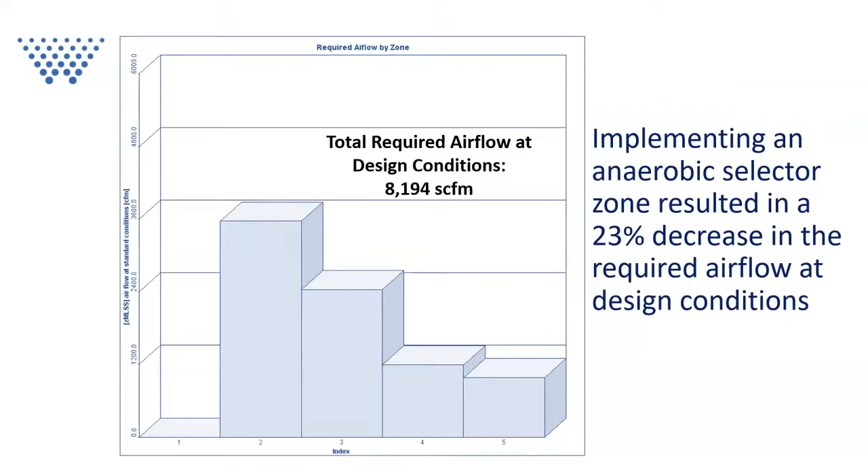And then cell 2 becomes our first aerated cell, and it requires about 3,600 SCFM as compared to the previous scenario when we ran it conventionally. Our first cell seeing the wastewater needed about 4,800 SCFM of air. So we did find the energy savings, and we did find the BNR benefits by putting in that anaerobic selector zone. And then we were able to prove with the model that BNR can be achieved at design conditions without an optimized BNR system. I mean, we didn't set out to make this a BNR plant, but we did take advantage of what the layout gave us and what the data gave us.

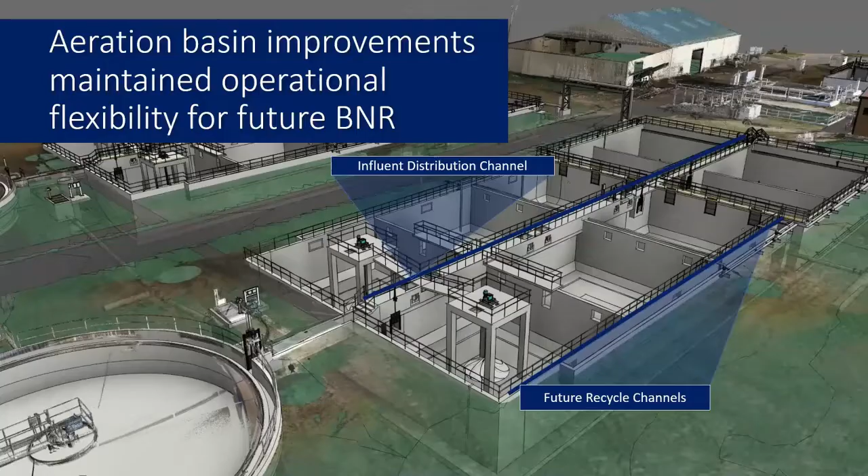So some key components of the existing infrastructure were maintained to provide operations flexibility. This is one thing that we always try to do when we go on a plant site: what's currently existing that we can use in the future. And so I think earlier I hit on the fact that this facility used to be fed by an influent distribution channel where primary effluent would go straight down the middle and be divided between the 6 different cells. We still wanted to give them that opportunity

to have that flexibility. If something goes on and we want to operate in a Johannesburg or some other kind of arrangement, we're able to take our primary effluent, and instead of going directly into the anaerobic zone that we've defined at cell number 1, we can still run down that middle distribution channel and put all of our influent flow into cell number 2. Or another option we have here is some step feed settings. If we want to feed into cells 1 and 2, we can do that.

And then finally, you see the future recycle channels I have highlighted here. Those were the old effluent channels that the wastewater flowed through. So the concrete was still in good condition. So we kept those active and put new gates on there, because in a future BNR scenario, all we have to do to get nitrate removal is simply put a recycle pump at the end of the basin, run 50 foot of piping and drop that into that recycle channel.

Then we have the ability to send that mixed liquor recycle back to cells 1, 2, or 3, simply by opening a gate. So we were able to take advantage of that existing infrastructure and spend a little bit of money to rehab it that really gives us some benefit if we have to make that conversion to BNR. So operational flexibility allowed for implementation of BNR.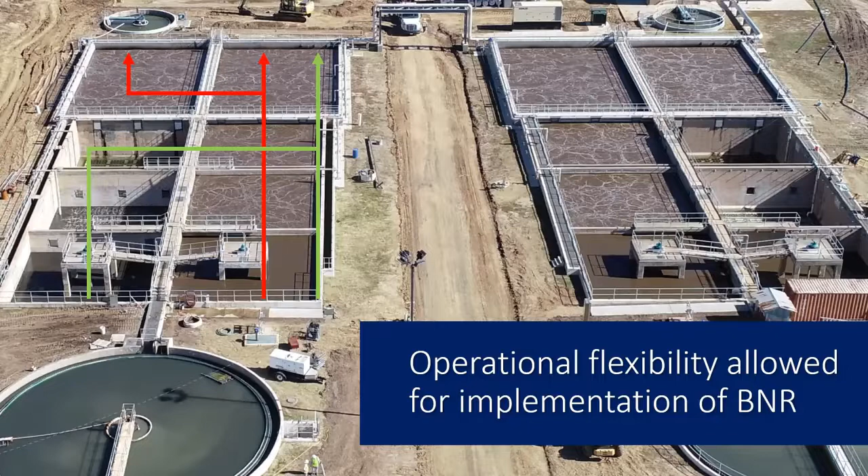And so by having those recycle gates and having gates separating the process, there are multiple configurations for biological phosphorus and nitrogen removal. So obviously the AO process is kind of how the system is set up now. Primary effluent comes into the anaerobic zone. The RAS gets recycled there as well.

But with just a few modifications and really minimal equipment, we can go to the A2O process, which gets us nitrate and phosphorus removal. And then if something's not working there and we need to optimize or change our processes, we can run the Johannesburg process, which allows our RAS to come into a dedicated anoxic cell, and then our influent comes into the anaerobic zone in cell number 2.

And just kind of from a visual, how that could be actually put into practice. Again, the AO process, this is how we operate now. RAS comes in along with primary effluent to the anaerobic cell, and we flow on through. Everything else is aerobic.

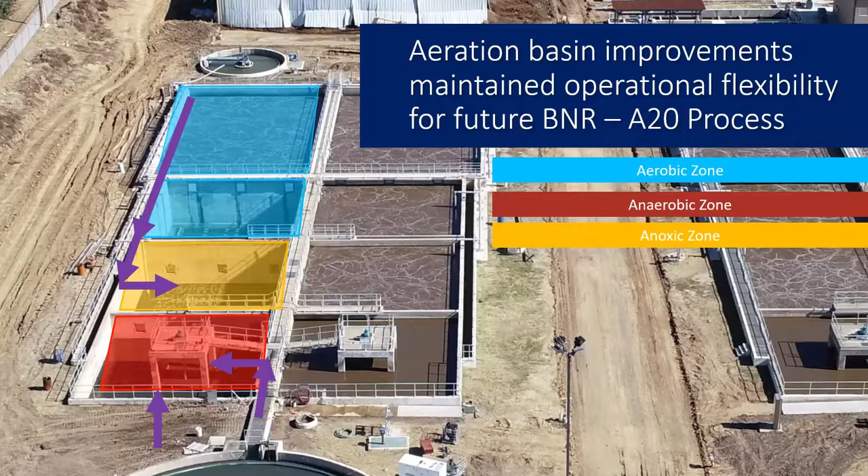But in the future, if we want to make this A2O, as I mentioned earlier, we put a mixed liquor recycle pump in at the end, taking advantage of that existing effluent channel that we're naming a recycle channel. And that gets our mixed liquor recycle back into cell 2, the anoxic zone. And we're still bringing our primary effluent and our RAS into our anaerobic zone.

And then if we need to do the Johannesburg process, we can bring our RAS only into that anoxic zone. We can turn off the diffusers or turn off the airflow in cell number 2 and route our primary effluent straight to that to get our anaerobic zone. And then, again, still have our mixed liquor recycle to take care of some of the nitrate issues that we may see in the future.

So the plant is now up and running. It's in compliance, and the operating staff is gaining some very valuable experience prior to future nutrient limits. Since they are not required to report phosphorus or nitrate or any of that, I do not have any data to share with you to prove what the model results showed, but I can tell you that they are passing their BOD, TSS, and nitrate or ammonia limits with flying colors.

So some of the key points to end with here: we always want to begin with the end in mind. If there's any kind of project that we're going to get involved in, we want to think about what might be required in 20 years, and is there anything we can do today, relatively cost effectively, that will save us a lot of heartache or heartburn in the future. So just because you don't have nutrient limits in your permit doesn't mean that there's no advantage to a BNR approach.

And we saw in Sulphur Springs, by implementing the AO process, we saved a significant amount of energy, and we did see some advantages from filamentous growth, and we're really confident that we are seeing that phosphorus and nitrogen removal right now.

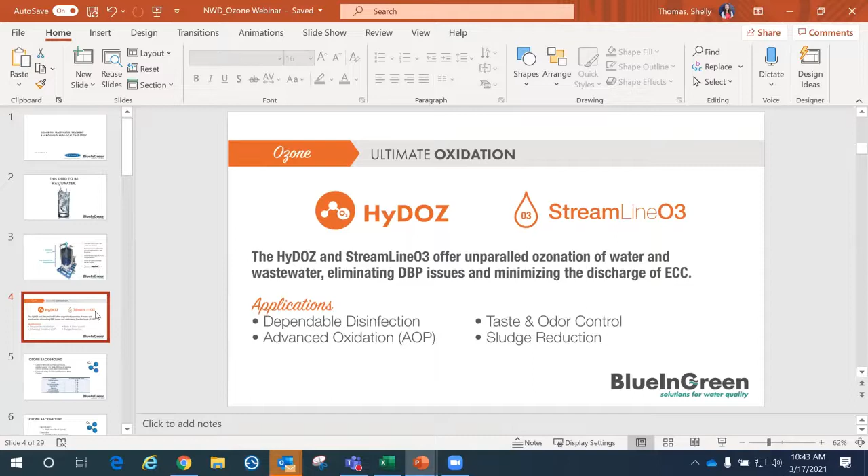What they offer is an unparalleled ozonation of water and wastewater. They eliminate the DBP issues and minimize the discharge of emerging contaminants. Applications would be in disinfection, obviously, advanced oxidation, taste and odor control, or sludge reduction. I think most of you are familiar with how ozonation works, so I'll skip past some of these. This is background on ozone and how all that works.

Here's an installation map, which is pretty exciting, although ozone is one of the areas we're not as much in yet, because it hasn't been a big focus for BlueInGreen, and that's starting to change now. Right now we have 5 installations in the US for ozonation, and over 100 installations in the rest of the US for the rest of our technology. So ozone is probably our newest one.

And then BlueInGreen's value proposition is obviously utilizing Henry's law, but that we can optimize transfer efficiency. So this results in a smaller footprint, like I mentioned, smaller piping and ancillaries, and also consuming 20 to 40% less of the molecules, which, especially with some molecules like CO2, are harder to come by. Of course, that's not in the ozone system, but that saves the municipality money.

And so initially, some of these systems may appear to be a lot more on the front end. They may be as much as 30% to double what the competing systems are out there. The real value is if we can speak with the municipalities or with you as engineers or operators and talk about the full life cycle cost, which of course for some municipalities isn't as important because maybe they use cash method of accounting or whatever, where it's really the money up front that's more important.

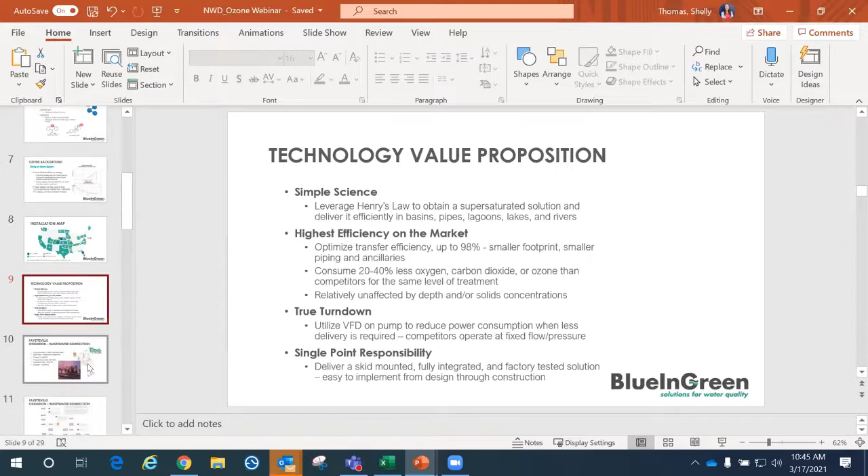And so oxygen generators have since been replaced with on-site liquid oxygen storage due to the premature fouling of ozone generators. So we did have some trouble initially with that. But ozone's very effective in the reduction of contaminants. And for the city of Fayetteville, this was very important because they wanted to be able to look to the future and have that as an option if they wanted to turn up the system to basically help them eliminate emerging contaminants. They have that option. Any questions here on this system?

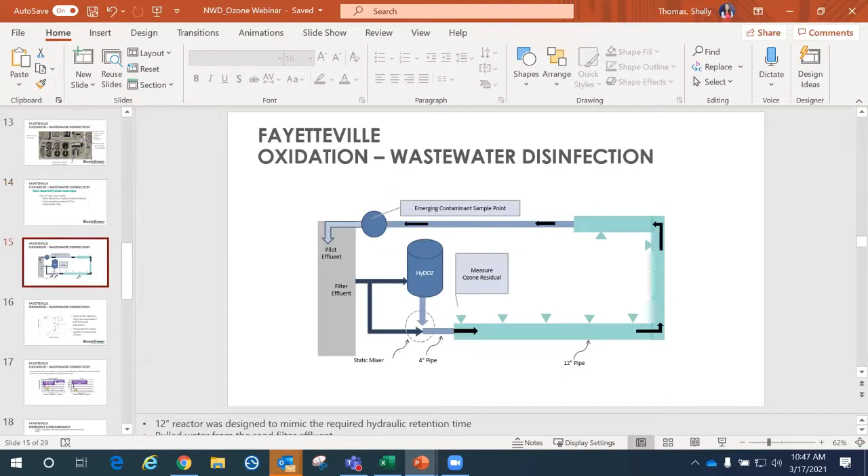Okay, we'll move on here. And so these are just more about the Fayetteville system, but let's move on to the next one.

Okay, yeah, you guys are more familiar with that. Do you want to offer any comments on the system? Not at the moment, I'll let you get through it. Okay, all right, thanks.

So another one that we did was the Clarksville oxidation. So it was ozone for primary disinfection. It was a 16 MGD plant, and the application was primary disinfection. So that was installed in 2015. So some of these are kind of older installations, and we have made some improvements since then on the technology.

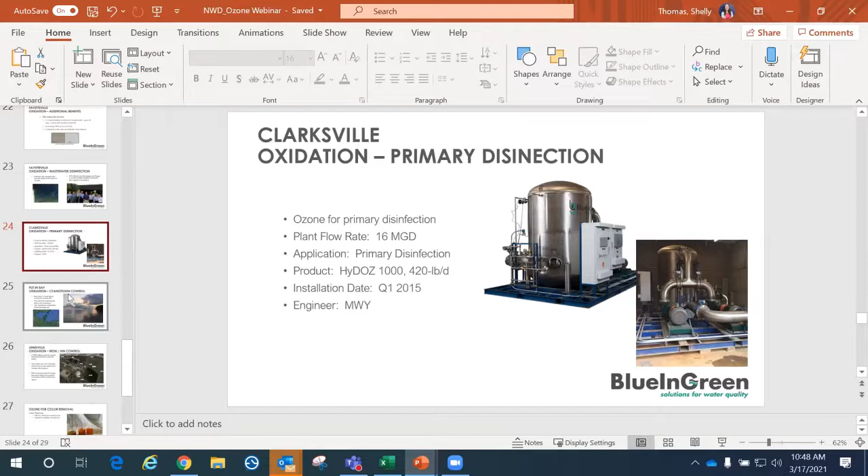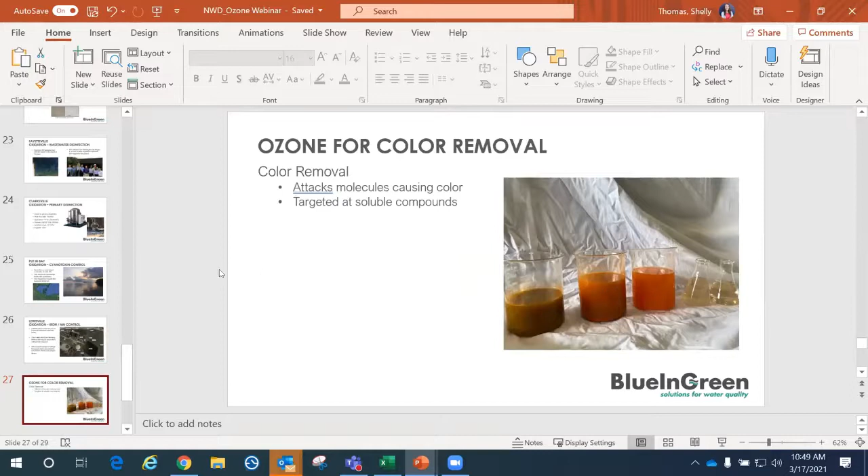And then the last one I'll go over is the Louisville one, which was an oxidation iron control. So they were utilizing ozone for various treatment objectives within the facility. One routine use is for minimizing iron in the recycle stream for residual solids lagoons. So they had a planned project to dredge the lagoon, and there were concerns over the excess iron. And you can see here the effect that ozone has on the color and oxidation and iron. So it showed some great improvements there.

And then finally, just to mention again that, as BlueInGreen has grown and also been acquired by CHART, we're happy to support joint proposals where we can present CHART systems in line as well with BlueInGreen technology.

And to compare some of the foam jacketed systems out there. So the vacuum jacketed versus the foam tanks, there's a lot of efficiencies that can be gained, and also the life cycle is just so much better. So the foam tanks, it's not really worth it to even repair them after the end of their life. But with CHART tanks, that is an option. So you have just more hold time, superior performance, lifespan, all that stuff.

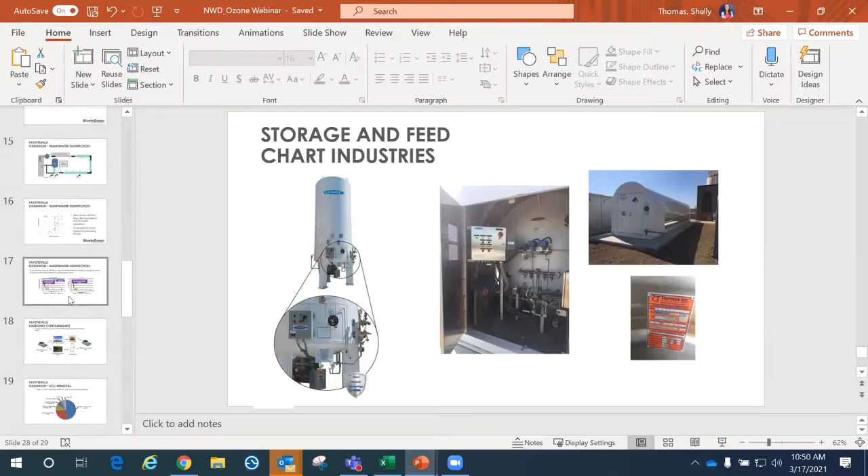I had a couple questions. I saw on a slide earlier you said that ozone is relatively unaffected by solids and things in the water. Yes. I was wondering, is that based on the treatment of the fecal coliform or overall? Well, I think it has to do with the BlueInGreen technology as well, because our BlueInGreen technology, we can operate even if there is a lot of solids, and that's just the unique function of the technology itself.

Okay, I was just wondering if they could quantify that. Do they know how the system affects the solids in the water or other parts of the treatment process when introducing ozone to, say, a stream that has a lot of turbidity in it? That's a good question. I'm sorry, I don't know the answer to that, but I will see if I can find out. I know that as far as some biological compounds go, we have the rupturing of the cell walls that occurs during disinfection. So if it's breaking apart those microbes, they're not going to continue to grow, right? So you'd have that reduction in that sense, but other than that, I might have to dig into that a bit more.

Okay, I was just wondering if that statement is directly about trying to quantify fecal coliform kill, or if they study its effects on other aspects of the process, such as reactions with ammonia and phosphorus and BOD that could be left over from the treatment process. Yeah, that's a very good question. If you don't mind, if you could just email me after this with your contact information, I'll be happy to follow up on that. Okay.

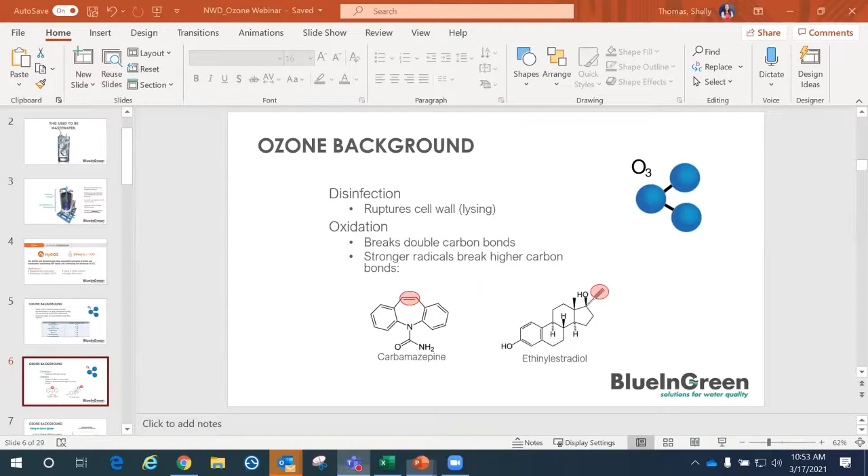Okay. Does anybody have any other questions for Shelley? Do you have any drinking water ozone applications, or is it all wastewater? Well, yes, we do have drinking water applications. So we have applications for oxygenation, which are typically used in industrial applications where they have a natural biological process that might need more dissolved oxygen. So we have our SDOX systems for that. And then we have our CDOX systems, which are more for pH control.

So CDOX systems use CO2 and basically create carbonic acid. So that's a replacement for anywhere where people might be using sulfuric acid or strong acids to affect the pH of a system. And sometimes that's used in water facilities as well. Do you have any installations at water plants? Yes, we do. For ozone? Oh, for ozone, yes. So we have 5 installations. Ozone is the newest one of the BlueInGreen technology. It's one that's been around, but it's not one we've really focused on until recently. I mean, at water plants, not at wastewater.

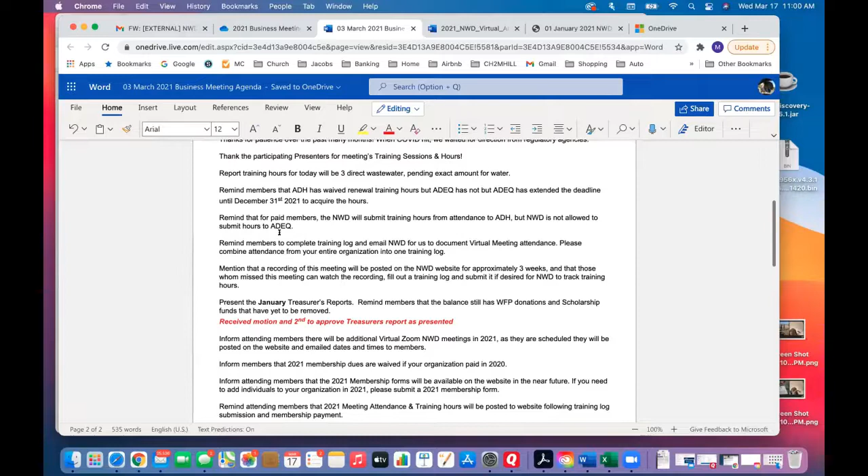So for today, a special thanks again to all the presenters. I know that not all the presenters are still on board, but we really, really appreciate the support, providing us the opportunity, the networking connections. We really appreciate it, taking the time out of your schedules. And like I mentioned before, we're approved for 3 direct training hours from ADEQ, and we will also submit 3 direct hours to ADH.

But please keep in mind that in order to do that, we cannot do it off of just the attendance roster from Zoom. You need to fill out the training log, and we will send another copy of that today. You probably have one in your email from last month as well, but you need to fill out a training roster like listed here with the meeting date, your organization name, your supervisor's name and a signature there. The big reason we have you do this is so we get everybody's proper last name associated with the training ID, and make sure each individual signs it. After everybody from your organization that attends or watches this recording after the fact documents it there, you can submit that. Just email them to the district, and we will get those documented and submitted to ADH for all those members that are in paid status.

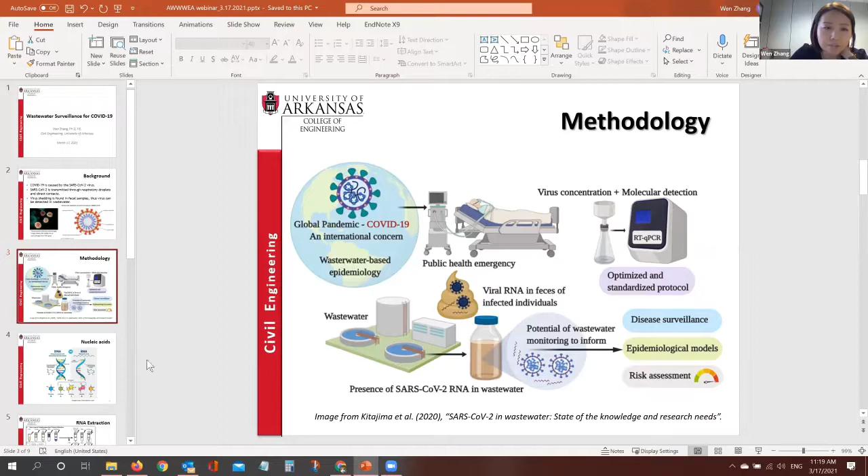C bonds with G with 3 hydrogen bonds, and A binds with T with 2 hydrogen bonds. The reason I'm talking about this is because in our PCR process, if you start with DNA, you need to break up these hydrogen bonds to deal with single strand DNA. With RNA, it seems like we don't have that step, but we actually need to convert RNA first to complementary DNA and then carry out the PCR process. I'll show you that in a minute.